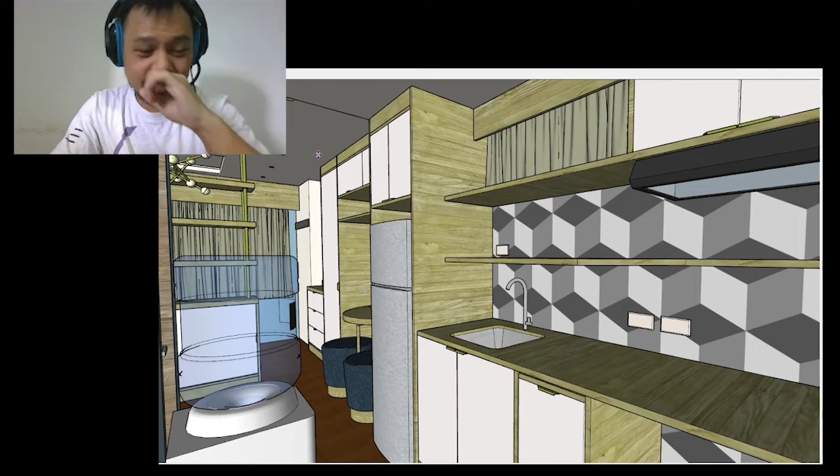Let me give you a little background. Last time I was finalizing everything, but right now it's all pretty much finalized. I submitted a rough figure to a couple of contractors so that they can provide cost estimates and billing estimates. Today I'm just gonna finish everything.

No more chit chat for today. Everything is already pretty much done, so let's get to this.

I'm gonna be using three different softwares today: SketchUp, of course, CAD, and Lumion. There are different kinds of software that can do everything I need all in one, and SketchUp is one of those softwares actually.

But there's just a different level of accuracy with CAD, and Lumion is more user-friendly, so I can get things done faster. I can also make floor plans and do renders here on SketchUp, but I've just been used to doing it that way ever since I can remember.

Just because I do it that way doesn't mean you have to. It all depends on your own personal preference. If you can give out the same level of output or better on a different software, go with it—whatever you feel comfortable with. Of course, if you work for a certain company that only allows certain software, then that's what you have to get used to.

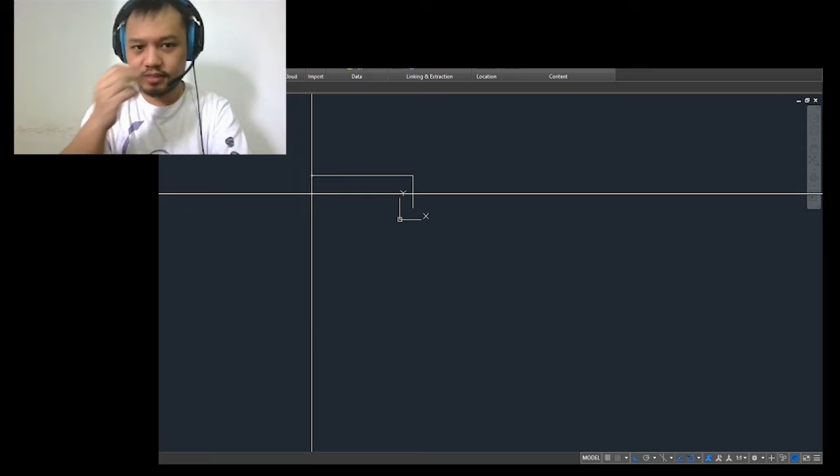You can actually export these kinds of things from SketchUp to CAD, but just for the sake of this, I'm gonna do it all from scratch. Besides, it's not really that hard to do—it's not like it's a super big building, it's just a condo unit, studio unit, for that matter.

Just give me a moment here. Let's see here. All right, so let's do this. Oh shoot. Delete. Okay, next. Okay, and let's go ahead and that and that. Okay. All right, all right, all right.

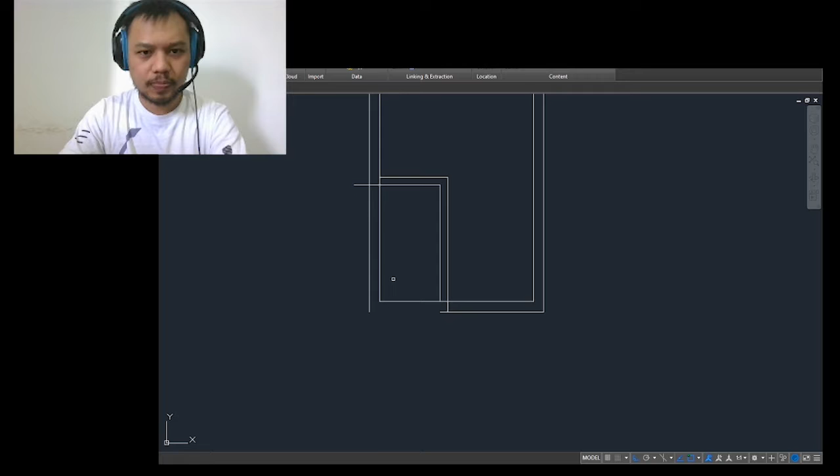I don't quite recall, but I'm pretty sure there's a column over here on this side. But we're kind of gonna disregard the restroom for now.

Okay, now how big is the door? 1030. There we go. And let's make sure that's correct. Let's see, 620, that's good, that's good. Right.

Okay, and then how far is the comfort room door? 1405. Right. Okay, so 1405, go over here. Excuse me, 700. There we go, trim that off. Okay.

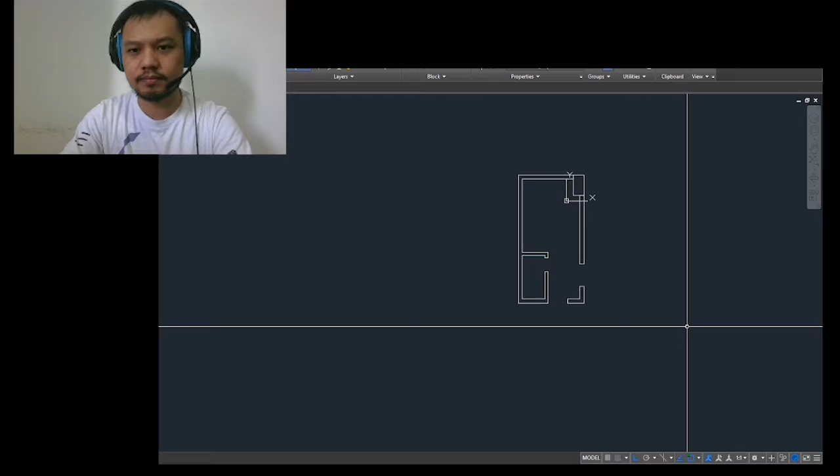Move 640 and then 1150. Right, trim those off. Okay, good, make those joined. Bam, so we get all that.

And then we have the window next to the bed. Where is it? There it is. 730 and 1605. All right, move 730, 1605. Bam, trim that, bam, bam. All right, join those. Bam. Okay.

Next thing we're going to do is make some doors. Let's say 45—oops, 45, 40. These measurements are just based on my knowledge of how they should fit, but you'd still have to actually go to site to know if they're correct.

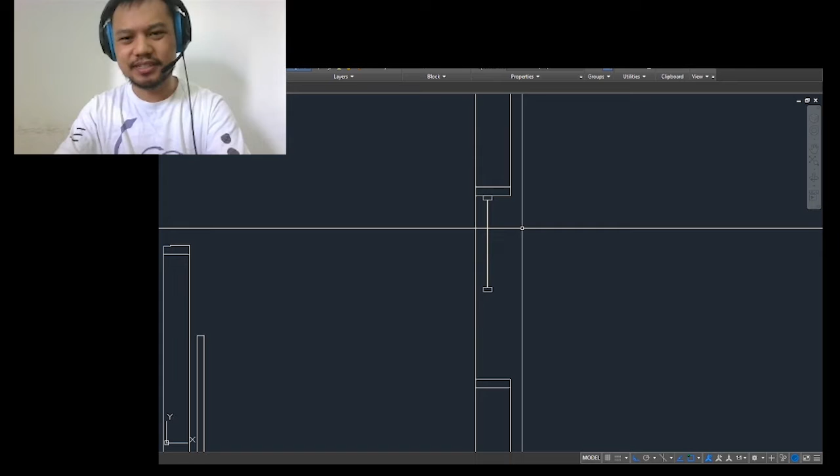And then let's go ahead, bam. This one is right underneath. I'm kind of meticulous with the way I draw, so I'm gonna put this in the back. So this is the sides of the window frame, the window sash, that's what it's called. Window sash. And this is the bottom, the base.

Then we're gonna go ahead and make this into a group first. I'm making them into groups now, but eventually I'm going to have to ungroup them because I'm also going to make them into layers. So let's go ahead and move this here. Bam.

So now we can remove this one, and we're going to make another base for this. Once again, drawing order: center, back. Okay, now I'm gonna go ahead and copy this one here.

Shoot, I don't quite remember what kind of window this is. I have a feeling it was a casement window. Let me just take a moment here to go look back at it. One moment. Images, site visit, October. Man, I've been working on this for a while.

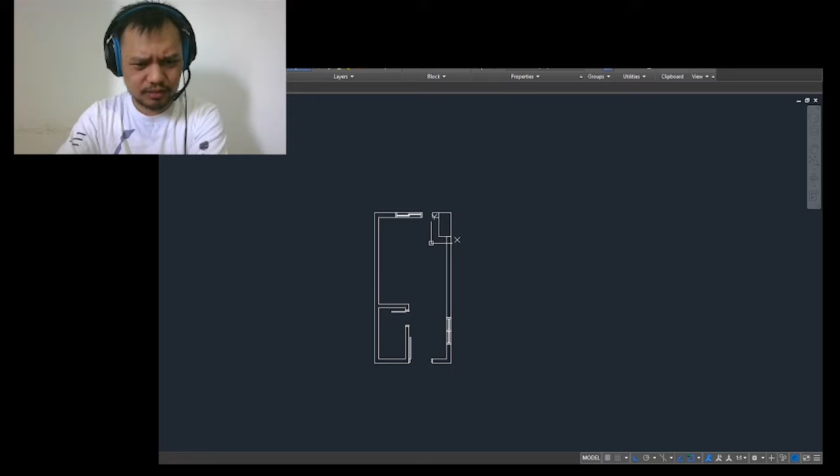Okay, and how does it work for the window over there? Excuse me, I'm so sorry. I just really had a hankering for something sweet earlier, so that's the thing about eating sweet food as you get older, huh? It just gets stuck in your throat.

Okay, I'm gonna have to guess, make a guess on how big this is, but let's go ahead and see what we got. First thing we're gonna do, ungroup this window, we'll just do them separately. Sometimes I forget that SketchUp and CAD have different properties. There we go.

Now, I'm gonna go ahead and take this. You're gonna take one of these, center. I feel like it's right in the middle, so. And we're gonna move this right there. Let's stretch it all the way to the end.

Bam. This one is actually a fixed window, so I'm going to go ahead and take these and take that, and oops, sorry. Let's move this one to the center as well. Okay, and to the end. Bam.

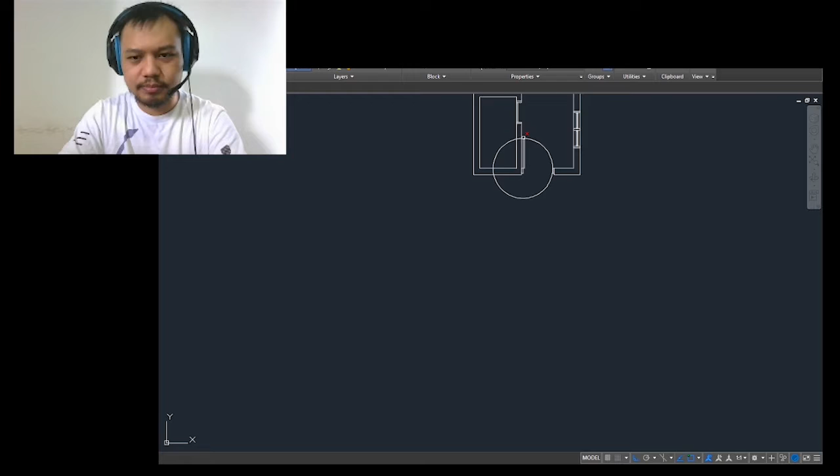So there's many ways to make a door swing. All that really matters is it represents that there's a door swing. So I'm going to go ahead and do it that way though. Group, edit, add. There, so I got that now. All right, so do we have everything correct now?

So I got two awning type windows in the kitchen and one large awning type here in the main area, and a fixed window. Then we got two doors. One of them we're going to close off because we're not going to be dealing with the comfort room at the moment. We're not going to be dealing with the toilet.

All right, and with this one, let's just delete these. And we're going to copy this one.

Now for a reflected ceiling plan, the doors have to be closed. Well, they don't have to be closed, but I advise you to just close them. And since we're also going to be able to see the top of the door, I'm going to add this here for the upper door, the upper part of the door jamb, the header. I'm going to go ahead and send it to back.

Good. We're going to go ahead and copy this. Copy. Oops, grabbed it by the wrong spot. Sorry, got to grab it here.

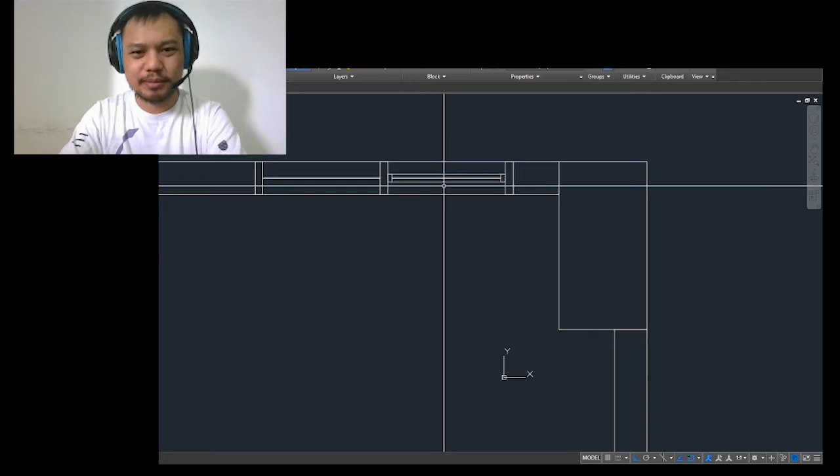Let me go ahead and fix that. Ungroup. Okay, oops, sorry, that's another thing about CAD. In SketchUp, when you grab something, it's all individual, separate, blah blah blah. But when you grab something here in CAD, you have to make sure to ungrab it, because sometimes what happens to me is I grab something way over here and then I'll grab something way over there that I'm going to delete, and then when I delete it, I delete both items. So if you're going to delete something, just delete it separately.

Or make sure to always press escape, because if you always press space, then it's just going to repeat the last command. All right, so now we have that, we have this, we have that. Next, what's next? Next, we're going to do the fit-ins.

So let's go ahead and do that. We're going to use this as our basis: 1790 and 600. Okay, 600, 1790, bam. All right, next, go ahead and close that here.

Got a rectangle. And here for the refrigerator, let's double check the measurements. We have 620 by 620 by 620. Okay, so 620, and then we're gonna make the thickness here. Close, okay, and copy that.

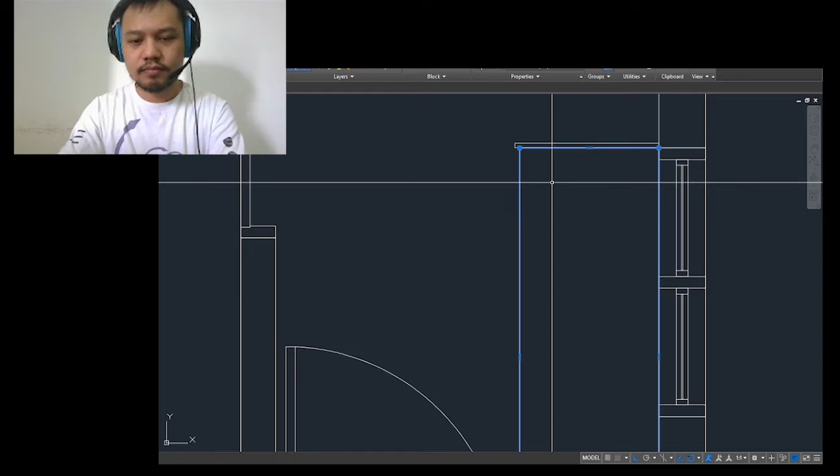Next. One thing that people don't take into consideration when doing these kind of designs is when you do tiling works, the back of this is going to be a bit thicker. So what I'm going to do is move this about 10, both of these about 10. And since we have a bit of space here to spare, I think it'll be fine.

And after that, I'm going to move this one here by 10, and this one by 10. Because the thickness of a tile can range somewhere between 5 millimeters to 8 millimeters, and then you have the thickness of the adhesive. So we're just going to make it safe by saying it's somewhere around 20. Bam.

And to really hammer the point home, I'm going to put a line between that. Bam. And we're going to move this up a bit, let's just say 2 millimeters. There we go. So yeah, it's a big deal because that's a lot of space. I mean, it's as thick as this wood here. So if you can imagine how many times something as small as that can affect what's going on site.

Well, it happens often. Okay, so now we got that. Next thing we have here, let's go ahead and create space here.

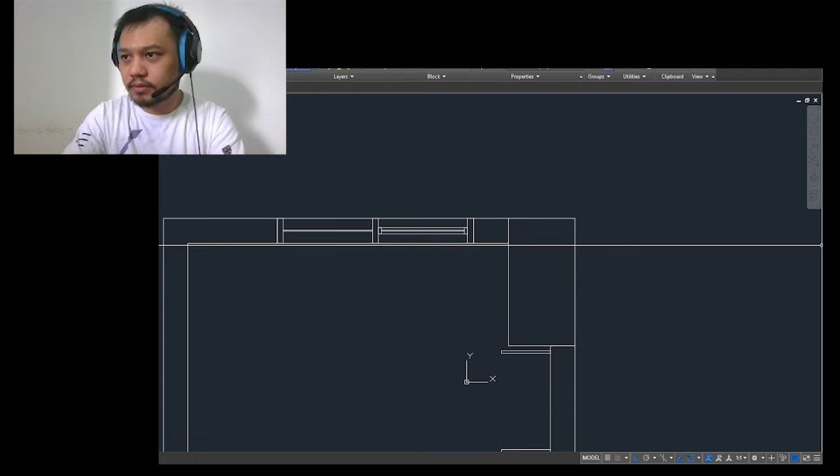So that's not right, something's wrong, because it should have touched this column. So let me check the thickness of it - if it's correct, 835. Measure that. 835, so that's correct. This is 800. And this is 840. So we have a mistake here somewhere.

Let's try working backwards, shall we? Hundred, bam. So as you can see, I like to be as precise as possible. Of course, this will still change once they do their site inspections, their own site inspections.

680. Oh man, something is way off. 420. Man, I have to figure this out. One moment.

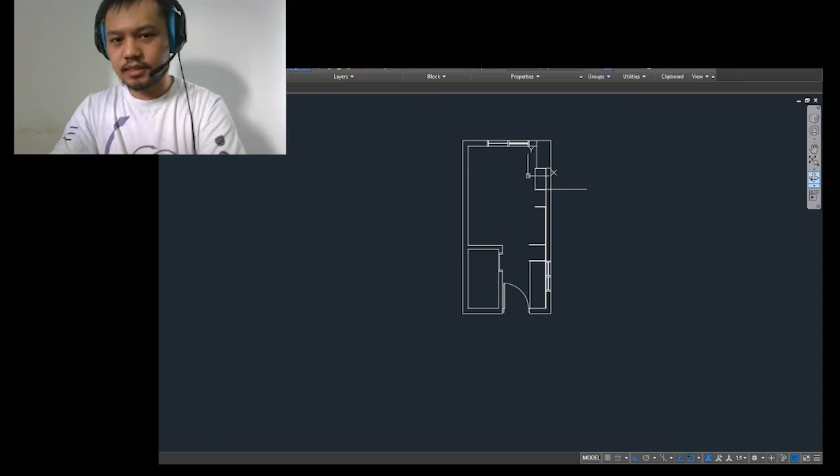3765. Let's see if it's really off by 40. 3765. 2340. 2380. Yep, it's off by 40. Okay, we found the problem. 40. 40. Okay.

Pretty sure that these are correct. So what we're gonna do is grab these, stretch it 40, just like that. Flush. Bam. Okay, let's check that again now.

So we have here - oh shoot, we have here 640, oh sorry, not 640, 1790. All the way here. Okay, 1790, correct. 620. Okay, 620, correct.

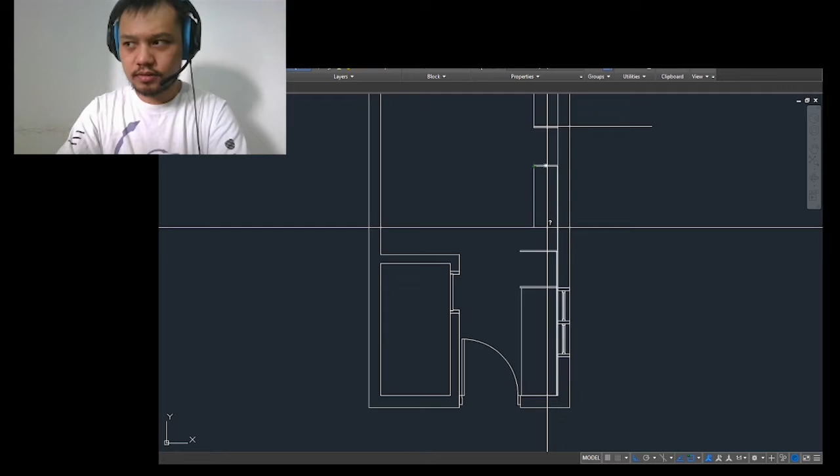1420. Measure. What the hell am I doing? Why is it wrong again? Damn it, I hate this.

1420 from the edge. I just moved it 20. I don't understand, I forgot to move again. 20. Okay, now it should be 1420. Thank you.

Okay, and this should be 640. Gosh. 640, yes okay. And lastly, this should be, how many did I say earlier? 800. 800, okay. From this end to this end. 800. We did it guys. Man, it took forever, I'm sorry.

Okay, next I'm gonna cover this up here, and we're gonna make a face of a drawer. Okay good. And drawer guides are usually 10 millimeters thick, so I'm gonna go ahead and make that 10 here. Bam, and we're just gonna mirror that to the other side. I'm not gonna make the details of the drawer guides themselves, but we are going to complete this whole drawer here.

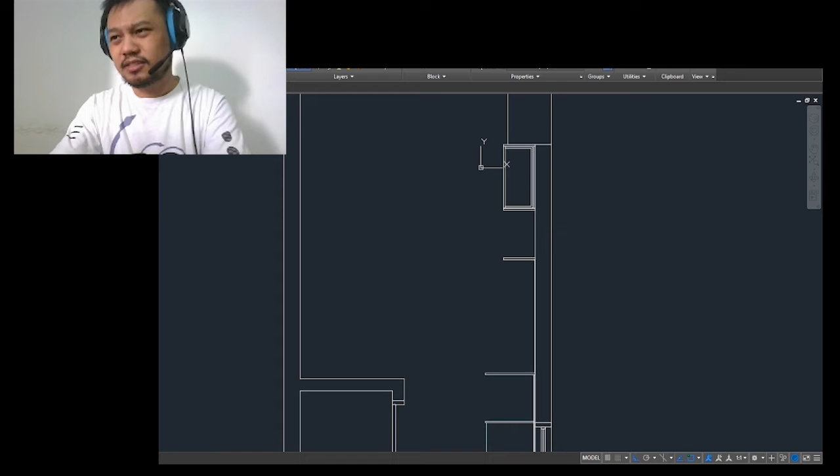The thing about as-built plans, though, is it's still made by humans, so we can't really say that it's going to be perfect, but we can do our best to make it perfect. There'll still be variations - the most you can hope for is a variation of about plus or minus 3 millimeters. Anyway, so this should be 400 right here, right?

400. Yeah, all right, so this one we're gonna kind of do the same thing.

But this isn't a drawer, so this is a bit different. This one is our special made clothes cabinet, closet, something - I don't know what you want to call it. So we're going to go ahead and extend this by about 10.

We don't want it to be flush to the wall like we did here with the cabinet. As much as possible, I don't really want anything flush to the wall, but there are some things we have to compromise when designing.

Now I'm not really sure how the contractor plans to make this cabinet. On my end, I provided the idea of having caster wheels below, and then above there should be drawer guides. That's my idea. But anyway, so this thing has no sidings, right? So bam.

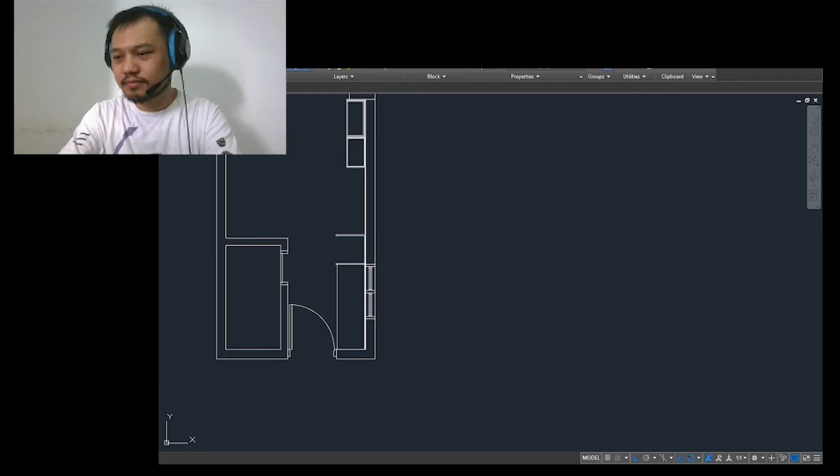So in this instance, I do have these two windows shown in the floor plan, and it's one of those things I really hated when I was studying architecture, because I don't show windows above that height since you wouldn't see them on the cut of where the floor plan is. So it's kind of interesting that these particular windows are at 1.7, so we can say that the cut is somewhere at 1.8.

And if that's the case, then obviously everything I did right here is incorrect, because this height right here is at 0.7, I believe - I don't remember my own drawing. Or 0.9 actually. So I made it counter height because it's not a desk, of course. So that's why it would be 0.9. I'm just realizing that now.

That's my own fault. What we're gonna do is go ahead and delete these, and we're just gonna make a rectangle here. Rectangle.

Bam. So the reason we cut it that high is because the average counter height is somewhere between 0.85 to 0.95 meters. I would advise making it 0.95, because the lower a countertop is - since a countertop is kind of a workspace - the more you have to bend your back, and the more you have to bend your back, the more back problems you're going to have, especially if you enjoy cooking.

So here, this is correct. Let's see here, next thing I'm gonna do is 195, 400. So here, 195, bam, and 400, bam. So this is actually a very small kitchen sink.

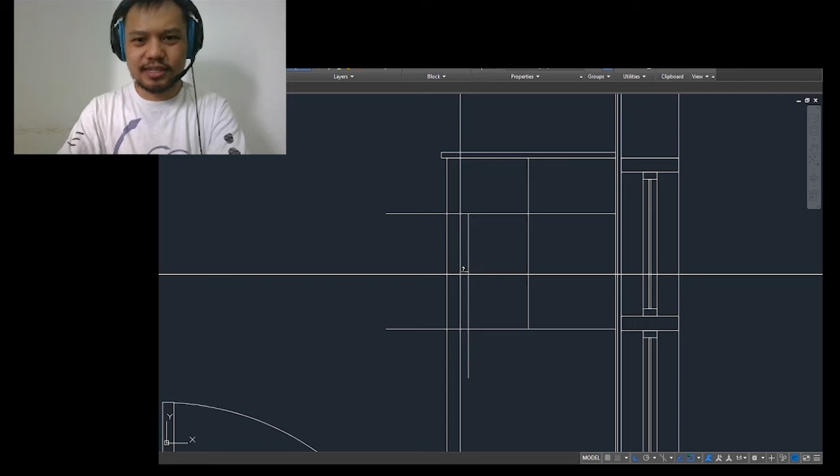This is another thing that gets confusing every now and then. It usually depends on the kind of sink you're going to install, but I would have the sink from the nose of the counter at least 2 to 3 inches away. So in this case, I made it 3 inches, and that's a pretty safe distance.

And this particular sink is just kind of a perfect square. So 400, bam. Okay.

The contractor is going to be the one providing details on where they're going to get that kind of sink. They can either fabricate it themselves, or they can go to department stores and try to look for one that will fit this criteria. Either way, all they have to do is make sure that I approve of the particular design.

So here, let's go ahead and make a radius of, I don't know, 100. Okay, get this here, bam, bam.

Okay, I think this is wrong, let me do that one more time. Let's try fillet, and we'll get a radius of 50 instead - 100 is a bit strong. Yeah, that's better.

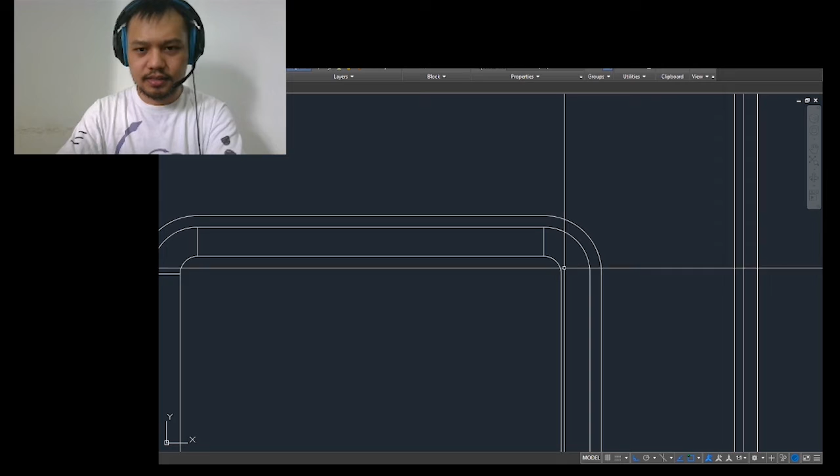Okay, so we can go ahead and take these, and the easier way to do it is just mirror them. Next thing I'm gonna do is put a drain here, right in the center. I'll just make it 2 inches.

And finally, here we're gonna make it 1 inch, a 1-incher. So 12.5. Move it back 50. Okay, that seems a bit far, let's make it, I don't know, 30. Yeah, that seems better. Copy that - oh shoot, copy, I always get circled when I try to make a copy.

100, that's fine. Polyline, bam, another polyline, bam, and we got our pipe. Let's go ahead and do this here. We'll make it 3 inches out. And this one, move that. Let's say 25. Let's copy again, make another 25. I think this is too far, let's go ahead and pull it back. Yeah, that's better.

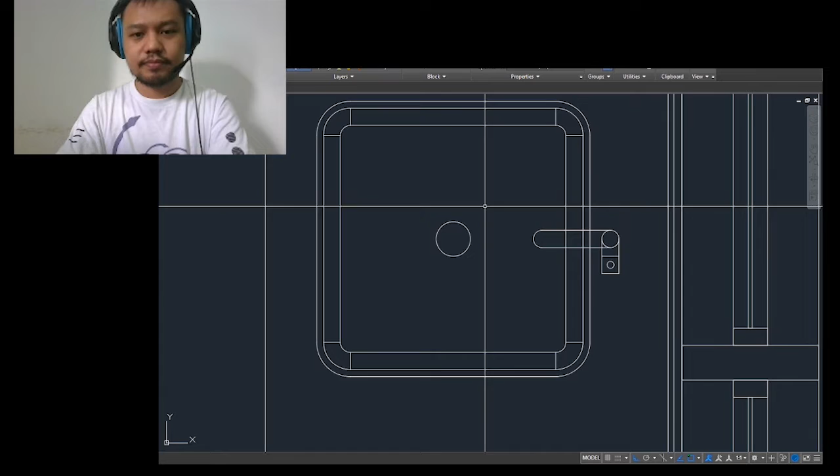Next thing we have here is the refrigerator, 600... is that right? Oh, they have a smaller ref actually, let me just double check that. 540 by 610. So 540, 610.

540, close. You can actually use the rectangle command - I'm so used to using the polyline command that I find it easier, because with the rectangle command I always get the wrong rotation and end up rotating it at the end. So I just stick with the polyline rule, it's easier for me.

All right, and then we'll extrude it a bit, about 25, 1 inch. PL, right, let's move this. Let's say 10, and let's get another one - 25, or sorry, not 25, 2 inches should be fine.

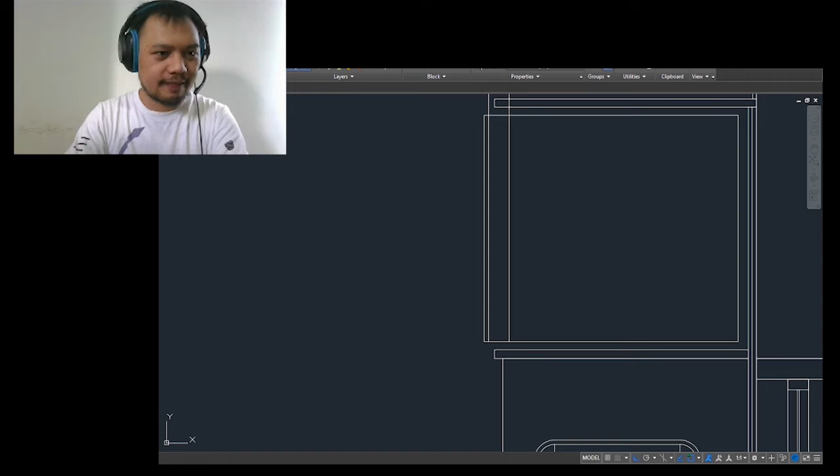Then let's make an arc here. Start and radius. Start and - oh shoot, no no no, what's a better... start and angle? Man, I always get this mixed up. Let's go with regular arc then - start, center, end, there we go.

Delete that. Trim these, bam bam bam, thank you ma'am, all right all right all right. Trim this, get rid of that. Copy this again for another, I don't know, 10. Yeah, that's our refrigerator.

And next we have, of course, our single burner induction cooker. I'm just gonna go very simple, 300 by 400. 300, close. Okay, go ahead and move this to 200, that's fine I suppose. And let's say 50.

And then this one, move that 50, I suppose. And then another 50. Trim these. Polyline. Circle, let's say 125 - oh shoot, circle again, one more time. 125, perfect. So this is our induction cooker.

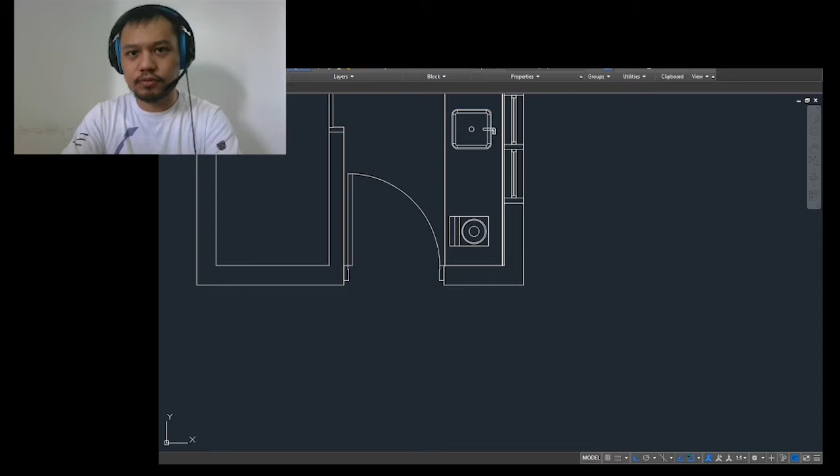So we have overhead cabinets here, so the depth is 400 by 640. All right, 400 by 640. Okay, close that. Next.

So we can actually center this, can't we? Let's make this into a group. Eventually, down the line, I'm going to start making layers, but for now I'm just getting the whole thing ready. And here on this end, we have shelves, which are just right there.

And over here, we have more overhead cabinets, so 400 - or let's just make a rectangle, simplify things, all right. Okay, good, nice nice nice.

Let's go ahead and start working on the other side. Gosh.

I know it's stressful, but this is a part of architecture, so if you want to be an architect, you gotta do it. And if you want to hire an architect, please, please, please respect what we do, especially if they put as much effort as you see me putting here.

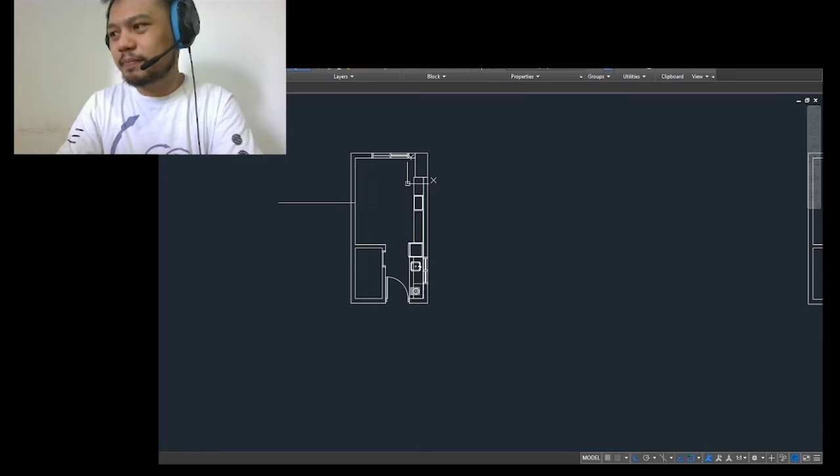Man, so I mentioned before, this I'm doing on the side, and I also have my main job. And as long as there's no conflict of interest, there's nothing to be concerned about - nothing for me, nothing for my job, no problem. So I do these things on the side. A lot of times people just don't understand or have the ability to appreciate those things, so I kind of just have to make the best of it.

Let's see here, rectangle, delete that. Okay. Then let's measure this distance here - 700, perfect. So it looks kind of small, but it's actually as big as this door right here. Crazy, right?

Next thing, just gonna put these 1-inch pipes. 150, 50. 150 and 50.

50 and 150. We're going to mirror that. And we're going to mirror those. And we're going to get the center of this here. Right there. Okay, and those are going to support the shelves. So as you can see, this floor plan is coming along nicely.

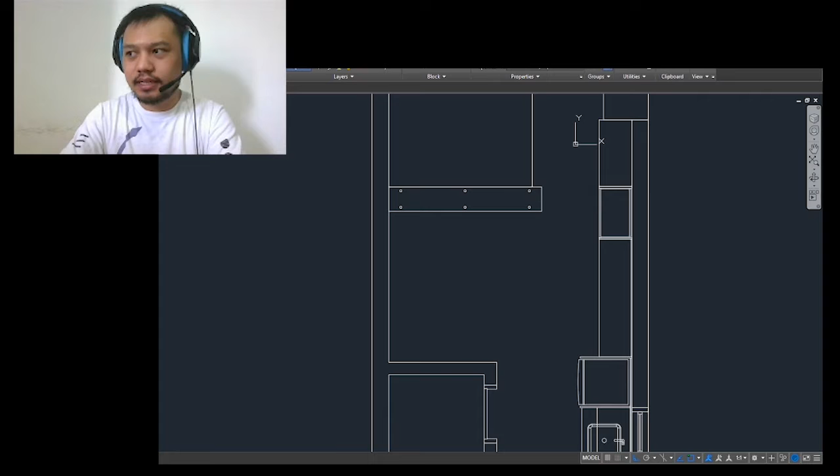Next, we got the sofa bed. Oh, here, by the way, we have a baseboard.

Let's start here. Move that by 10. Then stretch this edge. 10, bam. Okay. Close. Oops, that's not what I wanted. Where'd it go? Damn it. Shoot here. Okay, there we go. Get that one and get that one. Join. Okay, we got the baseboard and we have a baseboard on this end as well. 10. Bam. Close. All right, we got the baseboard.

Next, we're gonna add the sofa bed. This is, come on, 975 by 1624. 975, 1624. PL, 1624 and 975. Bam, sofa bed. All right.

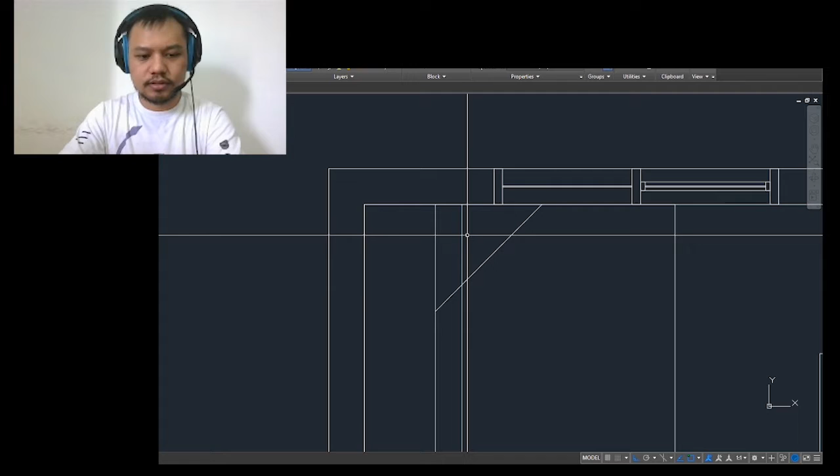So we're just gonna use basic drawing tools here, or drawing techniques. Let's see here. Go ahead and make this 300, or you know what, 400. Okay, copy that, 150, nice. PL, let's go here and say 600, 600, 600. Okay, get a line here, bam, delete that, trim this line, trim this line, okay, thank you. Then we're gonna make a line here, indicating pillows, bam, there's our bed. Here on this end, gonna make a line here, we're gonna move that 150, bam. Let's make it 75. Bam, bam, bam. So that's our sofa bed.

Okay, and that's the floor plan. Not bad, not bad. So what's the next part of this? Next part is the elevation.

Okay, let's start here. So as you can see, I moved that pretty far away. We're gonna make some lines here. CO. Bam. Oops, start here, sorry. So I didn't really put much detail into the bed and the sofa bed because they're not fixed items. So anything that's going to be fixed is what we're going to pay more attention to. I know that seems a bit unfair to the things that aren't fixed, but what can you do? Anyway.

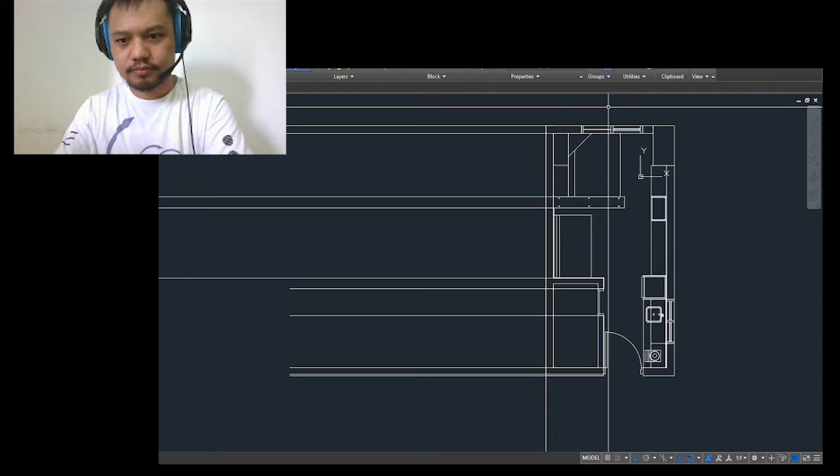Bam, bam, bam. Okay, next thing, gonna go ahead and do this. Oops. Let's go ahead and get this as well. And we kind of want to capture the window here. So we'll get that in a moment. Anyway, let's move this here. 500, nice. Gonna pull those out, and we're gonna extend them all the way there, okay?

Now let's get the ceiling heights. Okay, ceiling height number 1. Since we have several ceiling heights, we're gonna have to get them all. We have 2290, 240, 2290, 2400, 2500, and 2180. All right, I already forgot most of them. 2290, 2400, 2500, and 2180. Bam. Okay.

So the first one is right here. Bam. Okay, so we can delete these. The next one is right here somewhere. Okay, so anyway, that's pretty much it. The lowest part here is in the kitchen, so that's what's important.

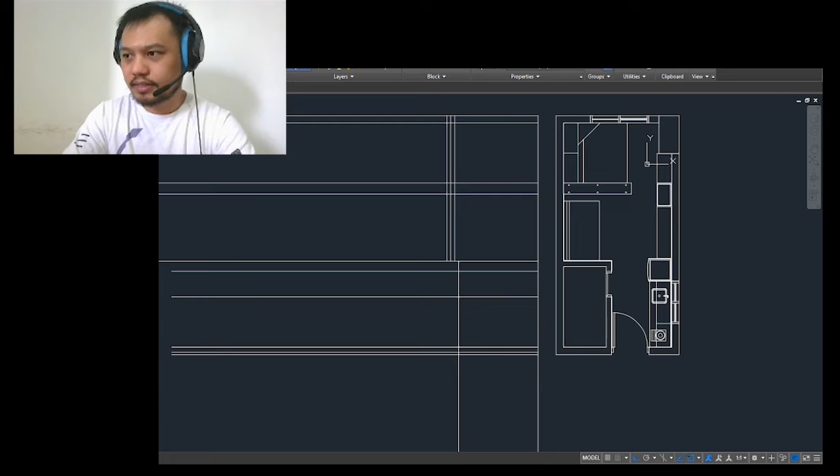There's a beam. All right, let me see here. Line, 235. Okay, 235. Let's go here. 235, and oh wait, that's wrong also. Should be from here. 235. There we go. Now we got it right. Right there.

Okay, then we have 200. CO 200. And then from there we have - I already forgot. All right, come on, where is it? 980. Okay, 980. Bam, perfect. Let's go ahead and trim this, trim that, remove this. Okay, trim this part. Nice.

Here, let's go ahead and put it as 50. No, that's too high. 40. Yeah, 40 is fine. 40, and then 12.5, and then here we'll have it at 20. 20? No, I think it's more like 15. Oh, sorry. 15. Bam. And we'll have this at 80. Yeah, just like that.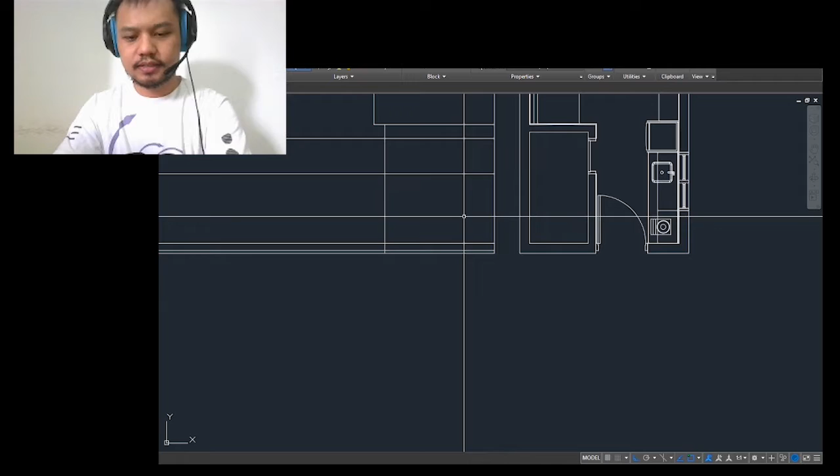Next, we have the height of the door. The height of the door is 2,200. Let's go ahead and make a line here, move that 2,200. Bam. Okay, I made a mistake. That can't be right. Oh, it is right though.

2,200. So how high is the ceiling here? Come on now, 2,290. How high did I make it here? 2180. This is the wrong one. Shoot. 2290. 2180, 2290. So this should be plus what? Oh, sorry, what was it again? 2180 plus 110. Gotcha, 110. Bam. Okay, perfect, now it's correct.

Okay, extend this up. What is the height of the comfort room door? We just have to add 140, or here, PL. Move this 140. Bam. Comfort room. Okay, we can join all of those. Bam. And here we have what?

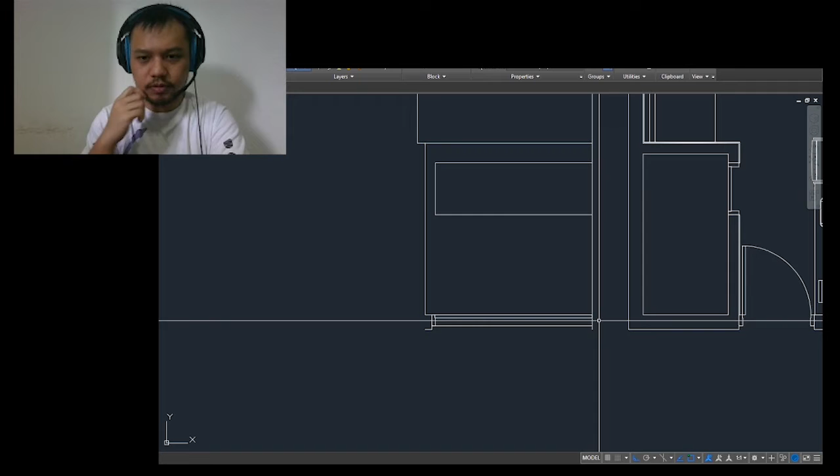So we got one jamb. Okay, and I'm gonna go ahead and make this 45, 45. Close this out over here. Bam. And a rectangle for the actual door. Bam. Perfect. Then let's go ahead and add a line just for safe measure right there. Bam.

With that said, I made a mistake over here, didn't I? It should be 2180. Yeah, this one is supposed to be down 110. Okay, perfect.

Next, let's go ahead and put one here. Let's make it 10. So this is actually way too thick. Let's try that again. I feel like it should just be 7.5. And then we'll move that 25. Then we'll move you 7.5. Okay, let's measure this. Measure this. 14. That's not right. Yeah, whatever.

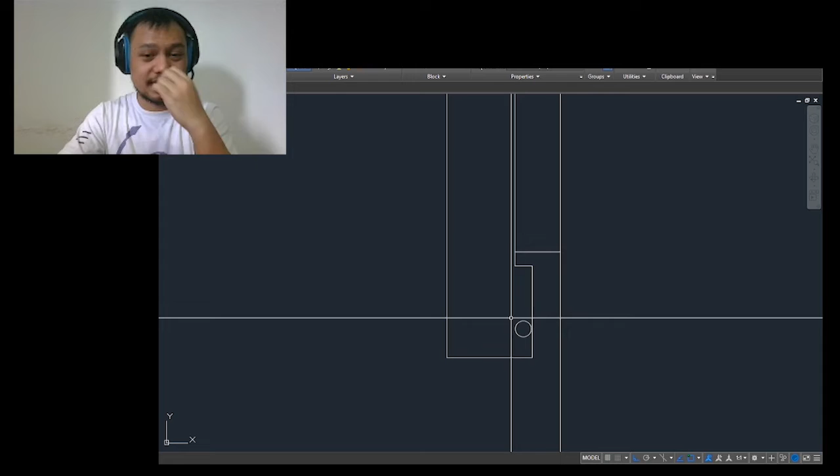Anyway, it's up to your personal preference. You can do it whichever way you feel looks best. But that's kind of how they taught it, because the whole idea of it is indirect lighting. And the reason we want indirect lighting over the bed is that way when you're trying to sleep, you don't have flashes of nightmares in your face. So you don't have the brightness keeping you awake. So even if it's on, you'd still be able to fall asleep pretty peacefully.

Okay, let's go ahead and make the window now. So the height of the window is at 905, and the total height is 1245. 905 and 1245. 905, 1245. Okay. 905. Oh my gosh, why am I always... 905, then 1245. Okay, so it's almost at the top.

Okay, get rid of those, get rid of that. I'm gonna go ahead and just make this a rectangle. Okay, get rid of that, get rid of that, get rid of that, bam. This one, go ahead and join these. So the reason I didn't make this part of that rectangle is because this is going to be a beam, which I should probably do now.

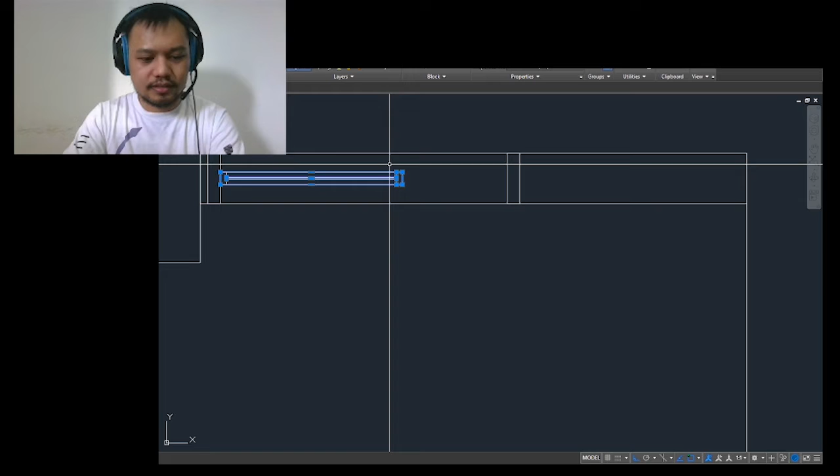Stretch. All right. Bam. Okay, so we have one. Now, the height of this one, nine hundred. 900, and then this is 50.

385, let's say. 385. Array. And we're going to make this into 3. And then we're going to make the height 385. Is that right?

Oh, that's because I didn't take into consideration the base. 385. There we go. That doesn't seem right.

900. Oh, that's right, the thickness of the shelf. Oh my gosh, copy. I always get circle, but I always press the O. Bam. Thickness of the shelf has been considered. Delete those.

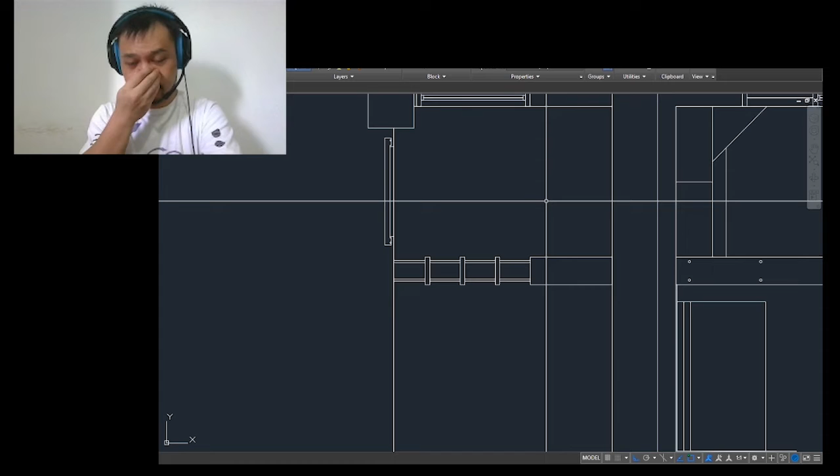And mirror. Bam. All right. There we go. So that's all of that. And then,

So on the elevation, what we're going to include is the outlets and the switches. Typical dimensions of an outlet and a switch. One moment. Let me finish this after all. I forgot.

Bam, bam, bam. Okay. Get that, get this, get that. Join those. Then this right here. Bam, trim. Bam, bam. Join those. All right, get these, get that, join.

Nice, nice, nice. Oh, I forgot about the door. Offset by 50. Bam. The door, we're not really going to put details on that. We're just going to put the opening. Bam and bam. Nice. Okay.

Next thing we're going to do is the outlets and the switches. So the typical plate for that is, let's make this 90. Ah, wrong way. Let's make this negative 90, sorry. Rotate negative 90.

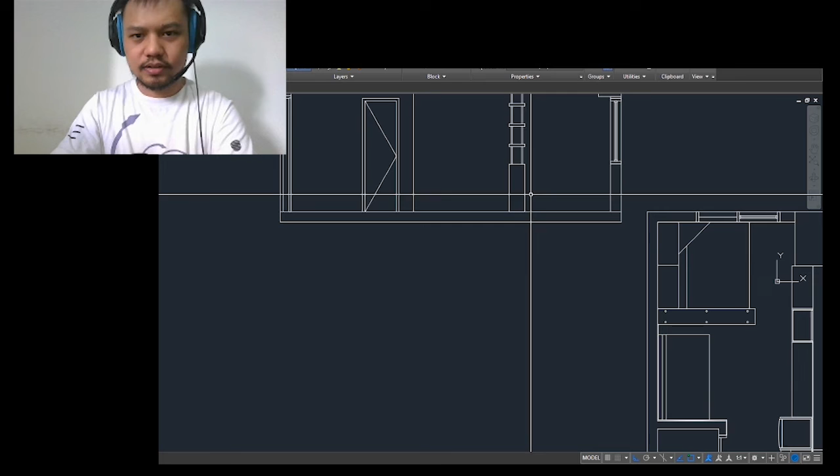Okay, everything is complete. Outlet, once again, the typical face dimensions are 70 millimeters by 120 millimeters. And they are from center, usually 300 millimeters off the ground.

Now here, we also have the baseboard, let's not forget, which we've made as 100. Okay. And then we're going to go ahead and make, and they're 1 centimeter thick. Bam. All right, perfect.

And where is this located in relation to the wall? We're going to go here, 1710. Okay, we're going to move that to 1710. Bam. So there it is. Very almost complete.

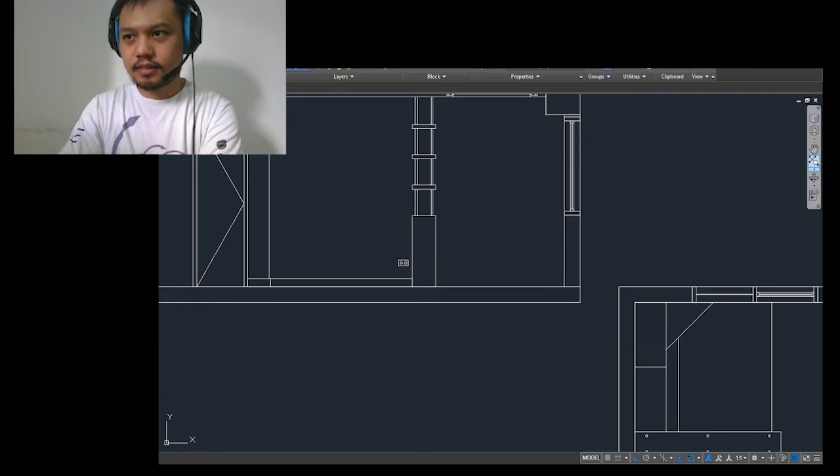And we have another one here near the bed. So let's see here. It's 685 off the ground and 140 to the wall. 685 and 140. So move that 685 and then move it 140. Why is it higher than the standard? Because the bed is here.

So remember, even though we do have standard heights and standard depths and standard specifications, we still have to customize it based on the need of the project. So as long as you can always justify it properly, then there's no problem. But if you just do it for the sake of it, then you might have a problem. All right.

Okay, let's go ahead and copy this one and put it here. Stretch out here, bam. And then here on this side, we also have the panel board. So let's go ahead and figure out where it is. How big is it, first of all?

250 by 395. So let's start there. 250, 395. Nice. Okay. Start here.

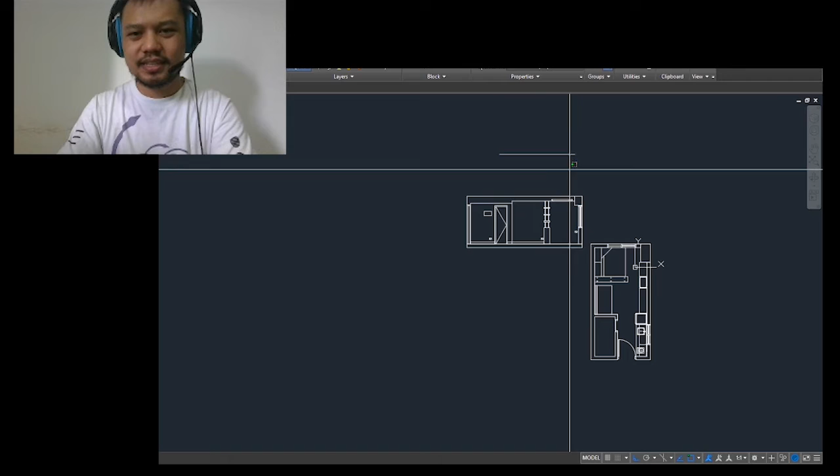Let's put the chandelier here. Oh, you know what, let's not. It's too much work, actually. It's not really necessary. What's necessary is we have all of these major things in sight. So save.

Next thing we're going to do is we're going to work on the other side. So for this case, let's see here. Let me go ahead and just double check something first. Oh no, it doesn't hit what I want it to hit. It doesn't hit the cove. So in this particular instance, this right here is not being hit. So I'm going to have to make it invisible. But how do you make it invisible?

That's a good question, let me show you guys. First things first. So anything that we can't see in the drawing or in this particular cut, because what the section is, when we take that same building and we cut it vertically at a certain point. But we also have to make sure that where we cut it is in the same area as where we'll show what everything is.

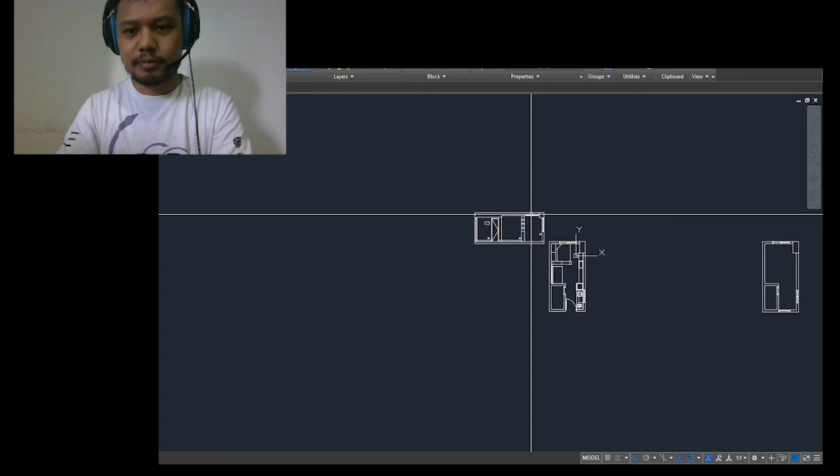So in this particular case, the area that I've cut it is right around here, right around this area. And the cove is in this area somewhere, it ends somewhere around here. So you wouldn't be able to see the cove from this cut. And the reason you can tell it's in this area is because it goes through both the door and the window.

Also, if I were to move it here, you would go through this cabinet shelf thingy, which I kind of don't want to go through that hassle of doing. So yeah, it's best to have it somewhere in this area. Like I said, the job is really hard, so it doesn't really impress - the average person won't be impressed if we do a section somewhere difficult, to be honest. Even when I was studying architecture, my professors wouldn't be impressed by that kind of stuff. So you might as well just do it in a safe spot that you can see everything and it's proper.

But in this kind of case, what we can do is just make it into a hidden line, so that way at least we know where it is. So we're going to go ahead and grip that, and I'll deal with it later when I start making layers.

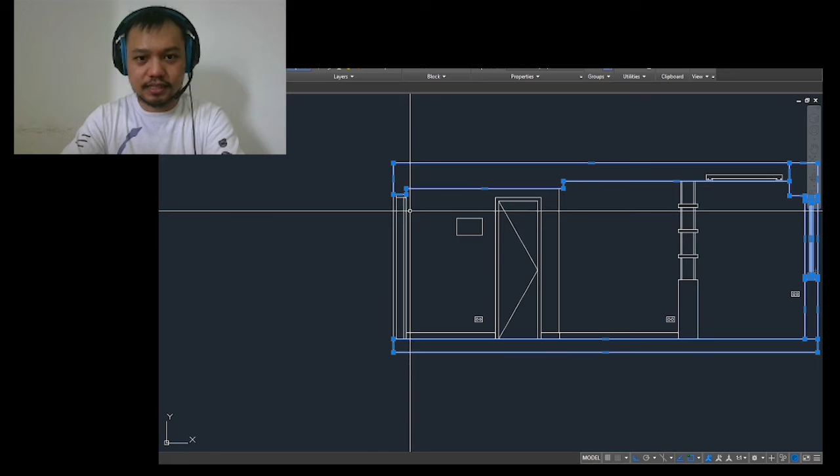We're going to mirror it. I don't know where the center is, so whatever, we'll just mirror it there. Whoops, ah darn it, made a mistake. Yes, I accidentally pressed cancel. Right there, okay.

And we're going to rotate it. Rotate it, why is it not? Why do I always get rotate? I think my O is broken. Then just align it there.

Yeah, perfect. So in this instance, we're actually going to take into consideration the cabinets, because these cabinets are fixed - the cabinets and the shelves.

Oh man, so many things to draw. Okay, and then here, let's go ahead and make this, move it up 900. Right, perfect.

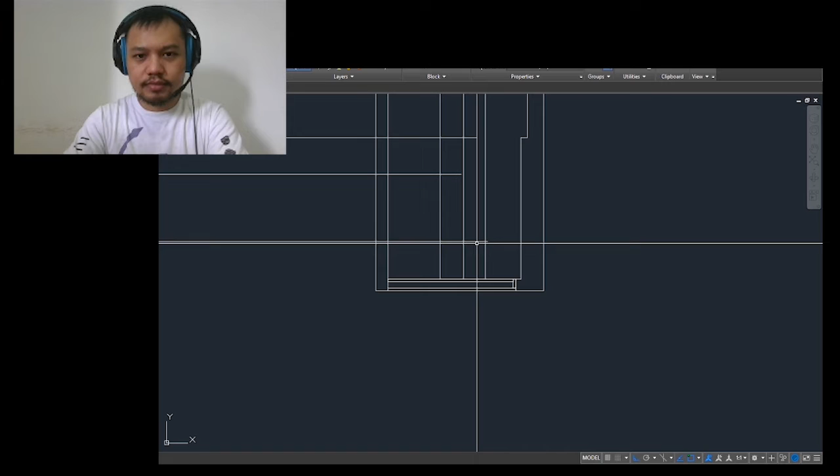Then we're going to go ahead and move this up. Okay. Shelf 1 and shelf 2. Right.

Okay, we're going to trim it right here, okay, so we can get rid of that. And for this one, we can copy these. Oh shoot, circle, copy these. Oh sorry, copy these, damn it. There, so we have a thickness there. And we'll copy this one as well. Bam, perfect.

Oh no, no no no no no. Let's see, and this one, 650.

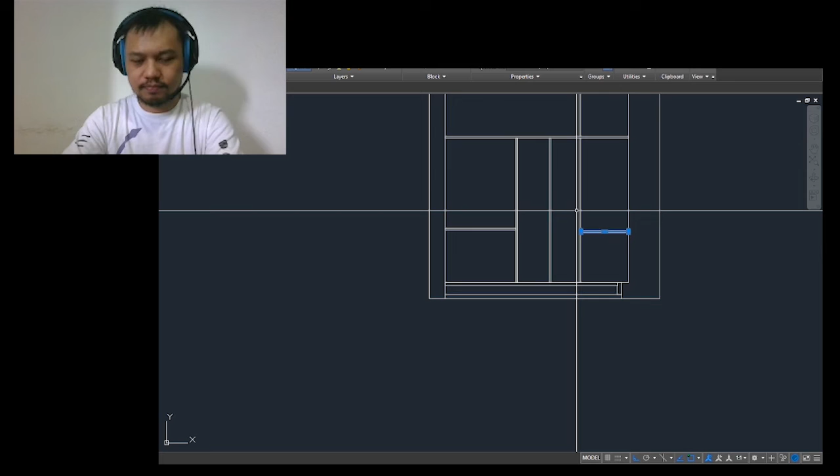Excuse me. Got that one. Gonna make a rectangle here. Perfect. Move that 120. Mirror. Bam. Perfect. Then copy this one.

Okay, cabinet 1. Here, gonna go ahead and move it up here. 20. Then move that 100. Rectangle. Bam.

Perfect. Okay, polyline, represent how it opens. Close. Another one over here. Close. All right, and here we have a fascia board, 200 millimeters in depth. 200. Perfect.

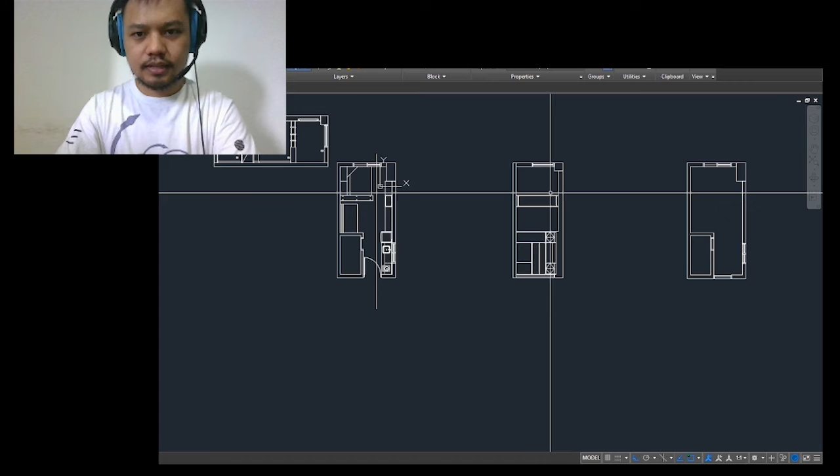And the next thing we're going to do, so there's a beam here. So we're going to go ahead and take this here. Bam. All right, and here, beam. Okay, delete that. Perfect.

And we have more overhead cabinets on the other end. So let's go ahead and check our SketchUp file, which you guys can't see. I'm sorry.

And this one, 1720. PL, move 1720. Another PL. Oh no, that doesn't seem right. You know what, let me try that again.

Bam. Move 1720. Bam. Okay, copy that. 20. Oh no, sorry, let's just make a new line. Bam, bam, close. All right, and is that right?

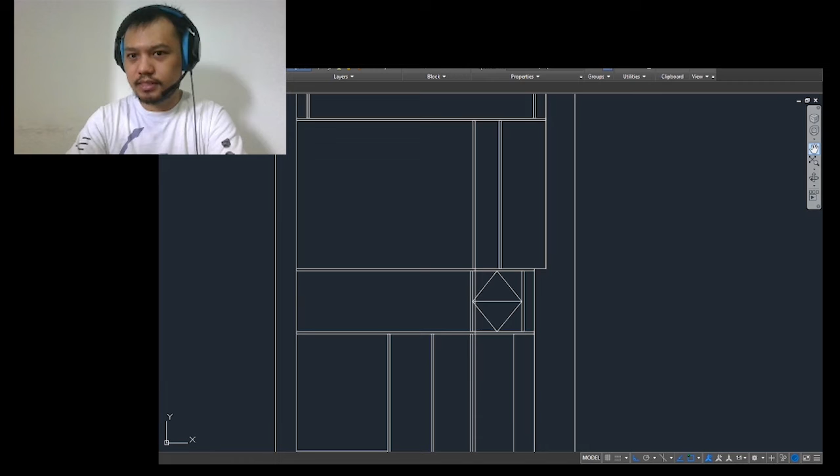Well, it's the correct distance, so we're going to go ahead and stick with that. The next distance we have to work with is this one. Oops, shoot. Which is 250. CO 250. Bam. Right? Please tell me it's right. Yeah, 250. And then over here it is what? 250. Correct. Okay, okay, okay.

Good, good, good. Copy it one more time. Bring it up here. Move this 100. Bam, we're good. Next, rectangle. Rectangle command.

One there, one more on the other side. Good. Then we're going to show the opening. Bam. Mirror that. Bam. Okay, good job everybody.

Oh, we still have this over here, sorry. Back to the kitchen. Let's see here. Kitchen, kitchen, kitchen.

Okay, this is 330. So we're going to move this 330. Bam. And the width of this should be what? 310. Let's double check. 310. That's correct, that's correct. Good job, good job.

And then here, close that. Move this up by 100. And then we're going to make some rectangles again. Bam. Mirror that. Good.

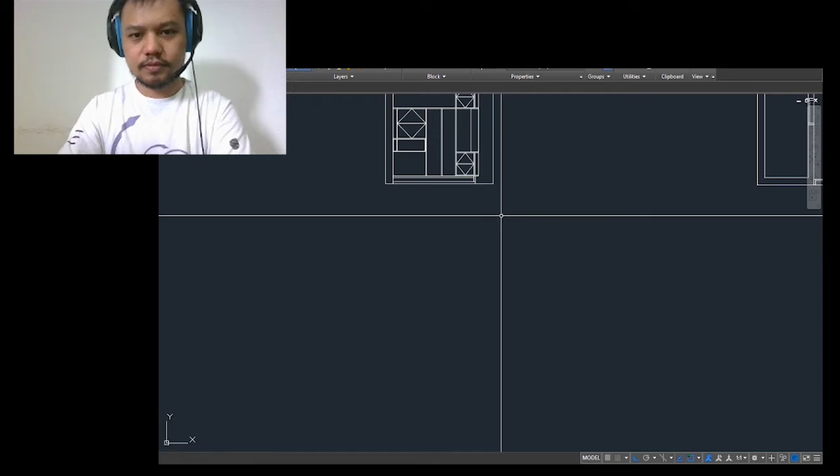Wow, okay. So the way that's going to work is it's just a mirror. We're looking at this side on this end, and we're looking at this side on this side. Next thing, let's see here.

We're going to put the outlets and the air conditioner, of course. 1750. Let's put this first. So this is our clothes hanger.

100 by 800 by 100, close. Okay, move that, 50. Okay, move that again by 20. Perfect.

Next, the air conditioner is way over here. So we have, so this is actually going to depend on the end user. 640, 16.5, or 6.5, 16.5, 640. 640, okay.

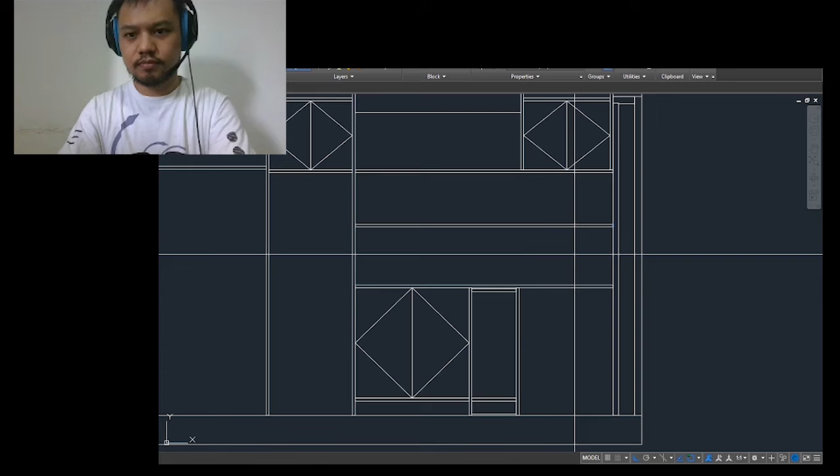Okay, save. And then we have the range hood. Let's go with 75. Join that, that's the range hood.

Curtains go here. Okay, so let's get this and copy it.

So some of these are already existing. 605, 150. Oh my gosh, what the hell? 605, 150. Perfect. And then we have here 135.

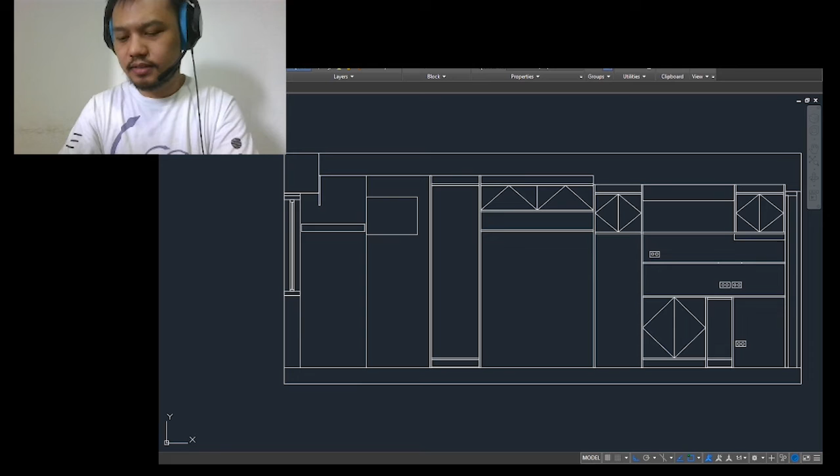1170, 1170, and 900. All right, so let's get one here. CO. Move 1170. Bam. And oops.

Gonna move that 900. So this depends also on the bracket for the TV. We're gonna go ahead and let the contractor handle that. And then we're gonna have one more up here.

Move 100. Then we're gonna have another data line. So for the data line, let's go ahead and fix that up. Let's go ahead and make a rectangle here, 15, 15, close, move, bam. There it is, cable line.

Oh, that's why I put two here. One of them is not an outlet, I think it's for data cable as well. Just copy this one, I don't know what I'm doing.

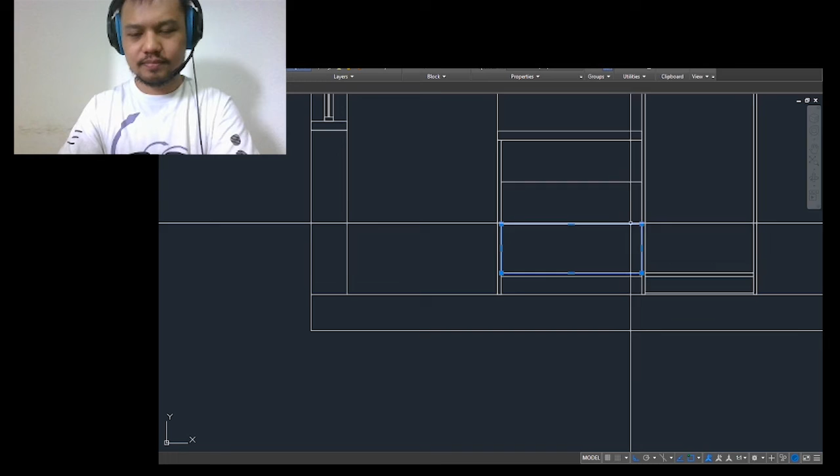But I really wanted them to be equal in height. So let me measure this. 730. Interesting. 730 divided by 3. 230, 233, 243. No wonder it was 245.

Okay, let's try that again then. Let's get rid of this one. Let's try to make it as equal as possible, and still be kind of, you know, not so weird looking. Okay, measure that. 250. So this one is 250 and these are 240.

Alrighty, and then we have more outlets. Let's see, I have 2 of them here. Just aligned here. How far away is it? 340. CO.

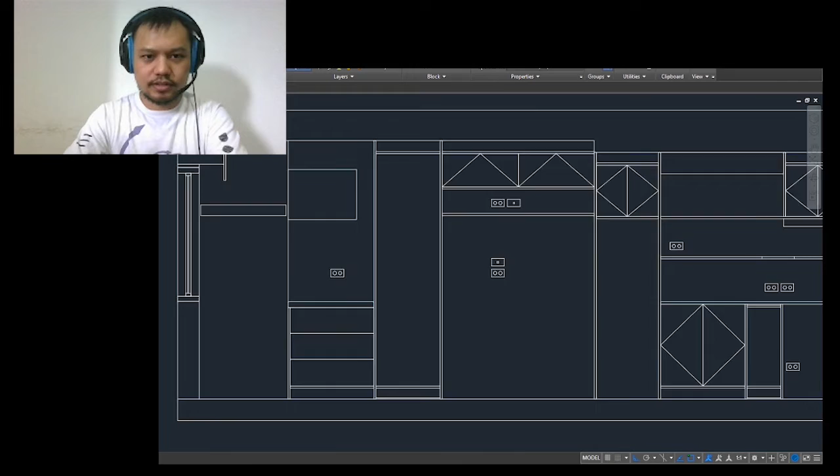Move 340. So this particular outlet is a bit special. Let's copy it first. Ungroup. Okay, this particular outlet is special because it's for the air conditioner, so it's just a single guy.

Come on, where is it? There you are. Group. Okay, and how far away are you from the AC? To 125. 125. Perfect. As for the other one, 70.

Okay, there it is, there it is. Perfect. We got all the outlets and everything, blah blah blah blah. Next is the sides.

Oh man, this is taking a while, isn't it? We're going 2 hours into this, guys. Let's see how we're gonna do this.

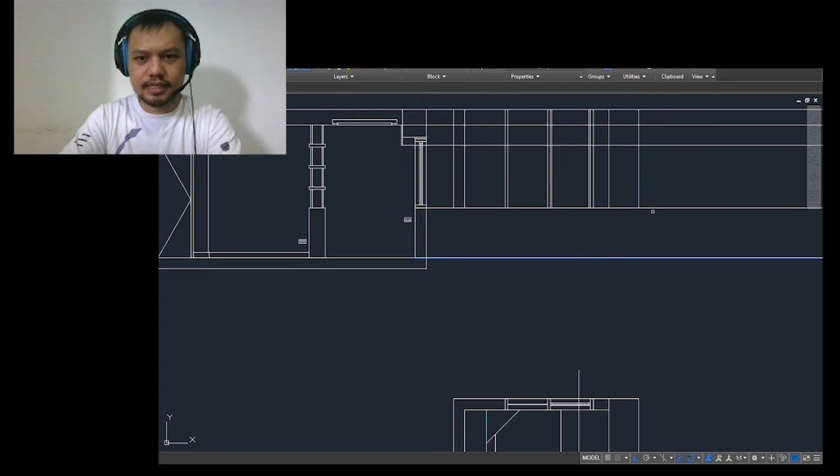Okay, good. Let's go ahead and trim these. So we can get rid of these. And let's just go ahead and extend these.

So we got the beam and we got the wall. Let's go ahead and take that, copy it into there. So that's the wall. We can go ahead and trim all these in here because it's only the wall. And then we can trim these as well.

And then we have the fascia board, which is this whole thing. Am I right? So we can get rid of those. And we can go ahead and get rid of these here by doing this. Delete, and nothing else, right? Good. Now that just leaves the window.

Let's go ahead and start by making a giant rectangle. Then we're going to offset that by 50. And then we're going to get these lines right here. And what about these here? This one, join. This one, join. All right, now we can get rid of these.

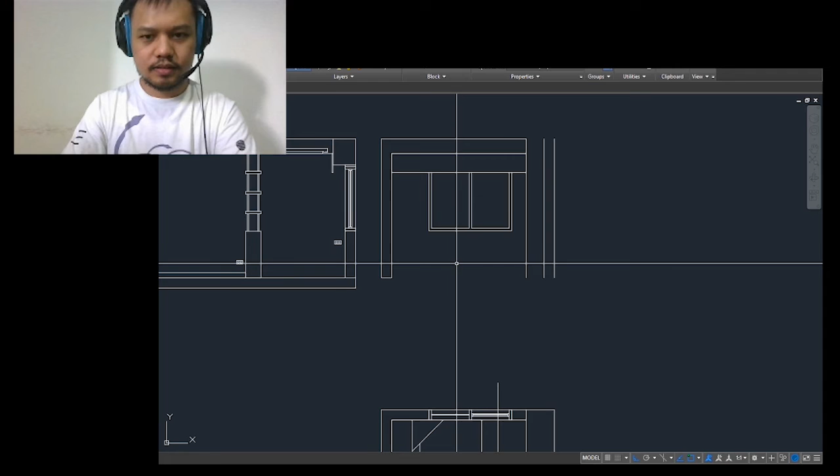Okay, let's go ahead and make a rectangle here. This right here is gonna stretch all the way over here. Perfect. Get that. Okay, perfect. And this one here, just like that. Get that. Move this here. Move that there. Get this. Okay, that. Join. All right, enclosed. Perfect.

And then what's next? We're gonna see this here. Okay. All right. Get that, get that. Good, good, good, good, good. And this. Okay. This one, 50. I believe it's 50.

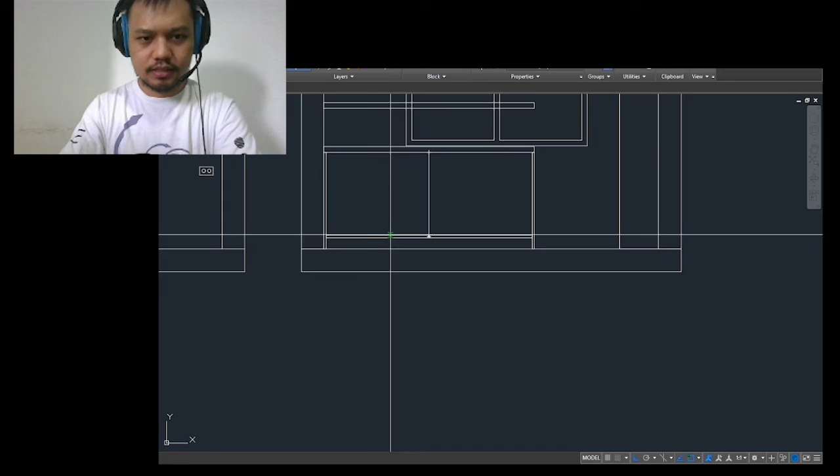And let's go ahead and make these. Oh wait, yeah, that's right. We're going to extend this by 25. And good. Now I'm going to have to trim this part. Trim, trim, trim. Trim, and trim. Perfect.

Okay, got this now. And copy that. 1, 2, and 3. Good job. Now we got this one. Oh shucks, shucks. Let's get this first. Need to center. Okay, copy that. Okay guys. 1, 2, 3. Perfect. Delete.

Delete that one up here. Delete. Okay. Delete this. Delete that. And we also have this here. Let's go ahead and do this first. Oh, 25. Oops, is that right? What happened?

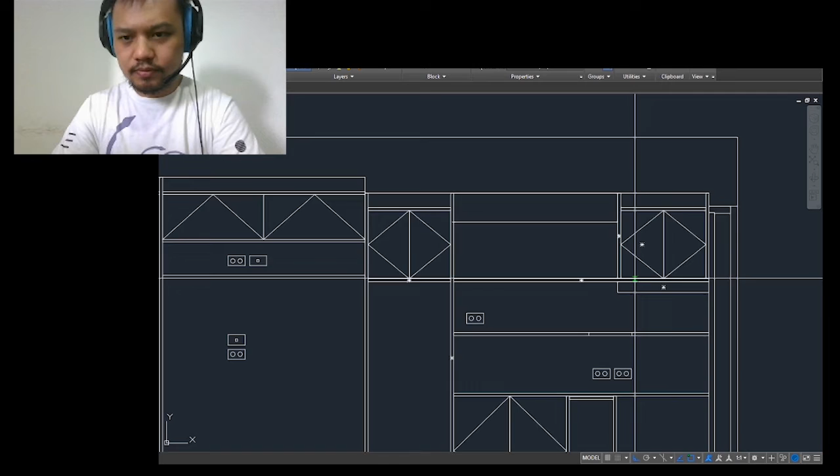Perfect, perfect, perfect. Delete that, delete this. And once again, we're going to leave that alone for now. And then here we also have the same situation going on, which I forgot about. So, okay. Offset 50, good. Then PL. Okay, move 25. Mirror that. There we go. Trim those. All right, join, join, join.

Next thing we're going to do here is offset 25. Do the same on the other side. 25. Good. How high is this supposed to be again? I don't have an indication of how high it is. It's 455, guys.

So let's just take one of these. Move 455. Perfect. Then take this, place them on the center here. Good. Take those, move them to the top as so. Indicate the opening. Nice. Get that, get this, delete, perfect. Save, save, save, save, save.

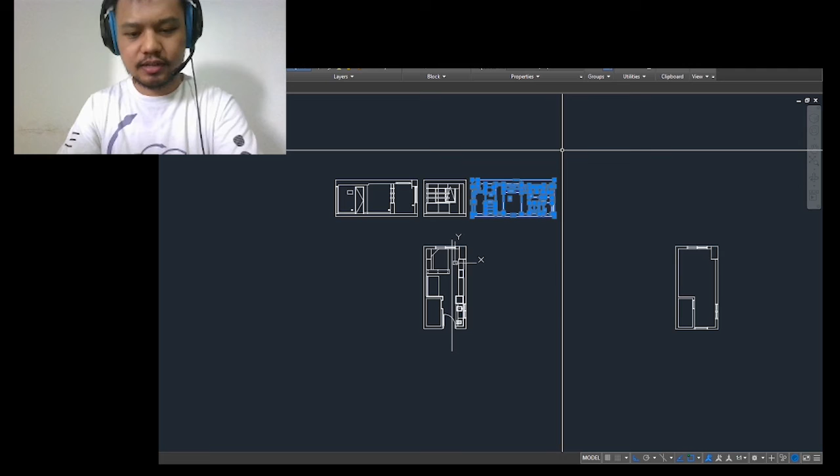So this part is lower, of course. So let's go ahead and copy this first. Oh my gosh, circle again. Copy. There. And let's start with, oh no, bring the kitchen closer here. Yeah. So what are we going to see here?

We're still going to see this. Going to see this. We're going to see the door. And let's say we're going to see, what else are we going to see? Because from this end, we can still see this cabinet.

I suppose we're going to see this here. We're going to see this definitely. And we're going to see this. Bam, okay, those are the things that we're going to see. Once again, here. Oh, we're going to see the door. Where's the door? Gonna go into my Arnold Schwarzenegger, I don't know.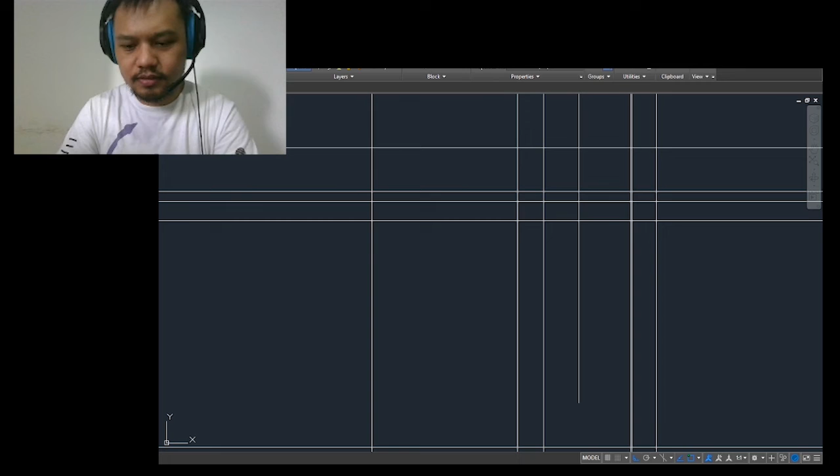So we don't really see the whole door, but we do see the door. Bam. Whoop, whoop, all right, next. Offset that, 50. Bam, all right. Whoa, that one. And that one, okay, get these. This one. And that one, join, okay.

So we're not actually going to see the whole door because of this one right here, right? No, not that one. Because of, where is it? This one, this one right here. Right.

So let's go ahead and cut that. Trim it here, cut it there. Bam. And here. And here we have a baseboard I forgot about. Oh, I'm already losing my mind from all this work.

How long is this video gonna be?

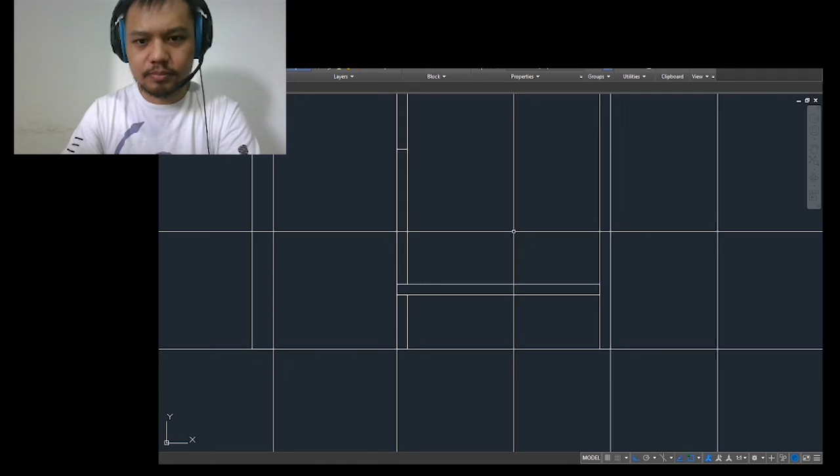Close, okay, move this up by 20. Okay. Bam, bam, bam, bam, okay. Then we have another 20 up here, or down here, sorry. All right, how high is this? Should be 100. 100 on the dot, perfect. Next.

Got this going on, 350. 200. 20, 330, oh fudge, 230. Oh my gosh, how high is this? I forgot already, how could I forget? I just typed it in too. This is what I don't like about CAD, man, it doesn't show. The hell. Uh-huh, 180.

Join that, move that up by, I don't know, let's say 15, I guess. That's fine. Bam. Copy that. 1, okay, and copy that one more time. This one, move it up by 10. 10. Save again, okay.

So this, what is this? Oh, it's the shelf, damn it. Okay, this is kind of an easy one though, we can just grab this. Okay, grab those, grab these, grab these. Yeah, make my life easier.

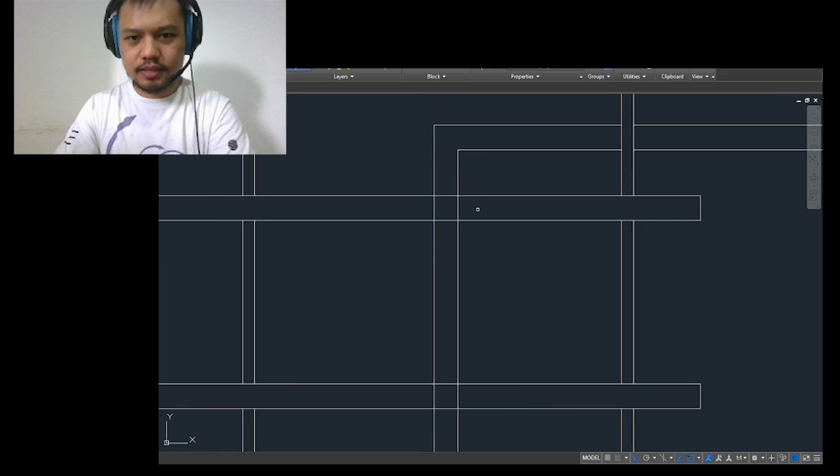Okay, and then we're gonna trim these. Bam, bam, bam, bam, and bam. Get rid of this. Oh no, I forgot again. The opening, how does this door open?

So we're actually on the wrong side. It opens towards the ref, doesn't it? I believe it does. This is the refrigerator on this side. Yeah, so it's something like this. Where is it? There it is. Okay.

All right, now we gotta get rid of that. And these, we can trim those. All right, all right, all right. Okay, get rid of that, get rid of these, get rid of that, get rid of that. Get rid of this, all right, delete. This one. Let's go ahead and put it all the way over here. Yeah, all right. Yeah.

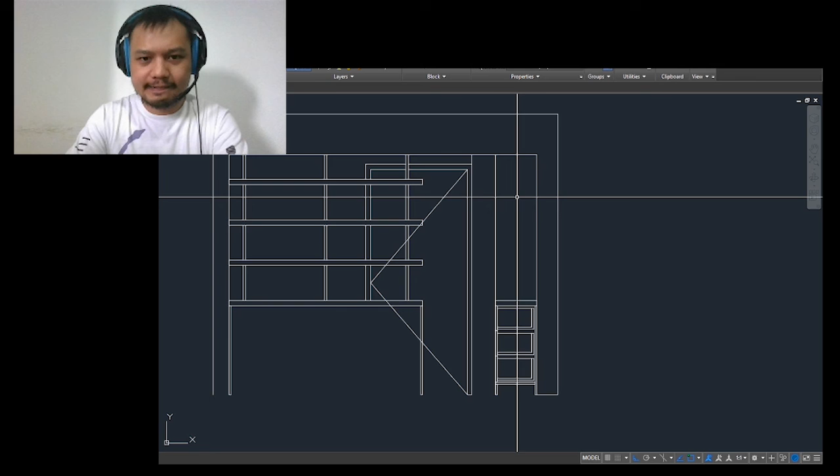Okay, there we go, all right, we're almost there guys. Not really, but we're just gonna say it. Here. Freaking circle, man. 150. And all the way here. All the way here, trim that. And this one.

Let's go ahead and copy this instead. Put it here, stretch all the way down to here. Then we're going to mirror it. Why? Because that's the proper way. There it is. Oh, we finally did it, guys.

Now, on this side is where we have most of the light switches, which is why I had to put so much effort on this side. Anyway, the light switches, I've actually put one on the cabinet here.

So I'm going to go ahead and copy one of these again. Copy, right there. And we're going to distinguish this by removing these and replacing them. You know what, let's keep them for a moment.

25, 15, 25. Close, okay. Mirror. Yeah, and that is how we distinguish the outlet from the switch. Okay, make that into a group.

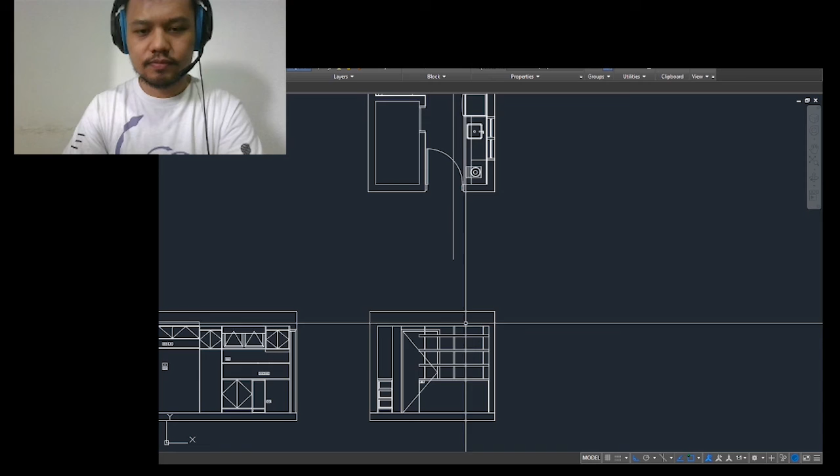Then we also have another switch on the other side of the wall, which is at 1335 from the floor and 95 from the wall. 1335, 95. Oh, this one is just flush to the door as well, so fudge it.

Why doesn't it work for me? Trim, trim, trim. I already forgot the dimensions, damn it. Rotate, bam. How far is it from the floor? It is 1355. Okay, move 1355. Bam, okay.

And let's go ahead and get it here. The door, how far is it from the door? Or the wall, sorry, 95. So we're going to take that. 95, bam, perfect. And we have one more light switch actually.

Way over here on this side of the wall, which is kind of low for a light switch, 1005. Oh, but this light switch we can't see. Damn. Well, we're just gonna have to make it invisible then. Let's see how far it is.

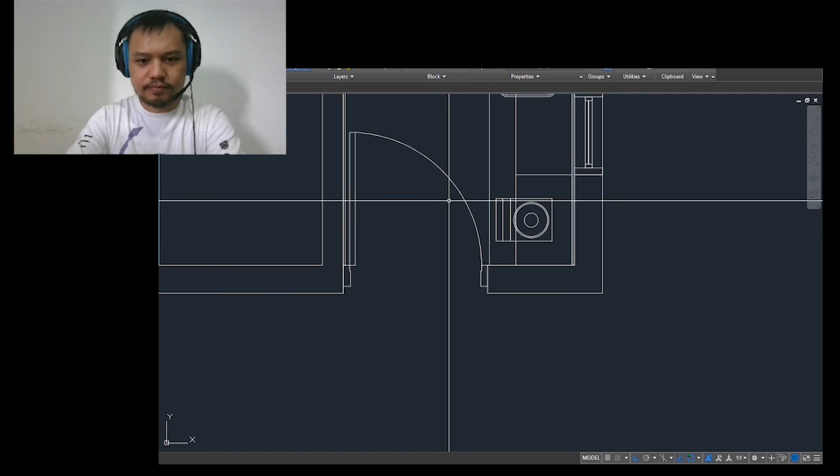Let's see here. How far is this from here? 95, okay, that's good, that's good. And then here, let's go ahead and have it at, we're in the middle of the drawer, so somewhere around here, 1200, yeah good.

Oh sorry, we want it further actually, somewhere here. Yeah, and then we're gonna have the last one. Excuse me, excuse me, excuse me. We forgot about the shelves. All right, let's add that, shall we?

Okay, delete that, copy this. Okay, very good, very good. Then we have one more here on the top. Move that 100, and we have the fascia on top of that. Nice job, nice job. Move this here. All right.

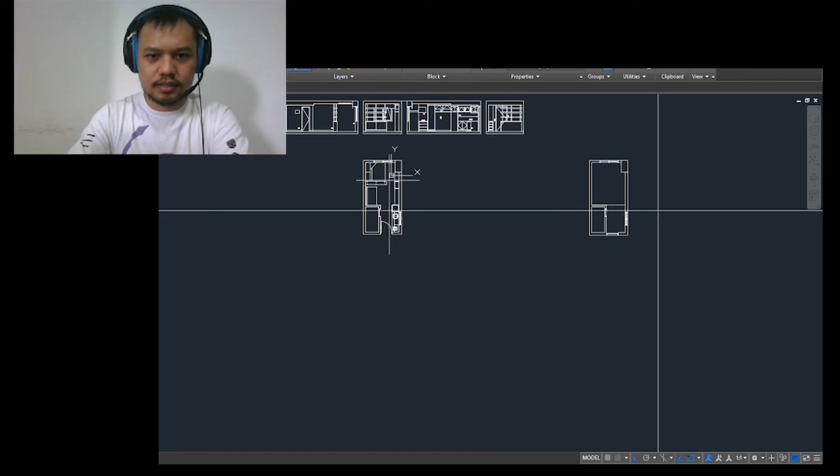This is the RCP, reflected ceiling plan. So we got this here. Move 70, bam. And then we got this here, 400. Okay, let me see, that goes all the way up to here. Right?

Oh wait, I forgot, we made some proper adjustments. So that means I'm going to have to take these wall thingies. Okay, and copy that. Right there. Which reminds me. Okay, there we go.

And let's see, let's go ahead and take these as well. These don't change. Ah frick, circle again. Copy. Darn it. How did that happen?

Is that right? To the end. 2,410. 2,450. How did that happen? How did that happen? Oh that's right, I forgot. I'm an idiot.

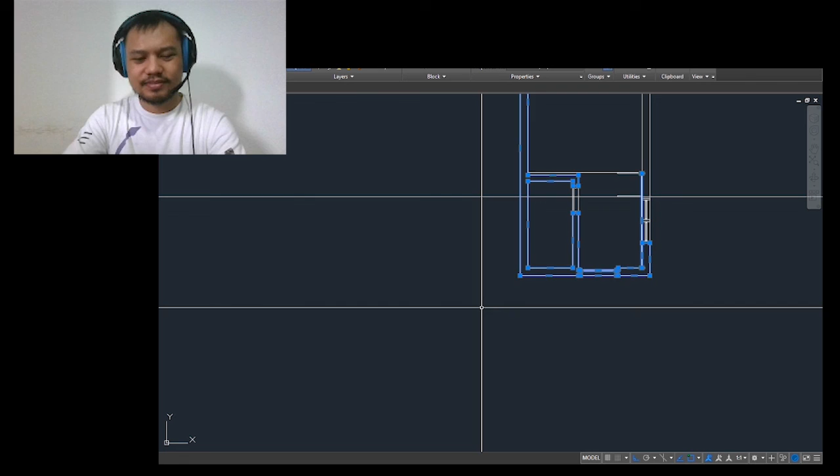40. This right here also should be 40. Stretch 40, bam. Sometimes I just forget things, I'm sorry. And then, 400, bam.

Okay, let's make this one. Okay. And what else here? This one goes all the way up to here, so we don't really have to do that, let's just take these. Oh my gosh, copy. Why? Okay, and then this one here. And finally, that one is left alone. That's fine, that's fine.

This one has the beam, which is 100, 235, okay. 235, okay, trim that. Nice. And then we have this one, 20. Okay good, and what's next?

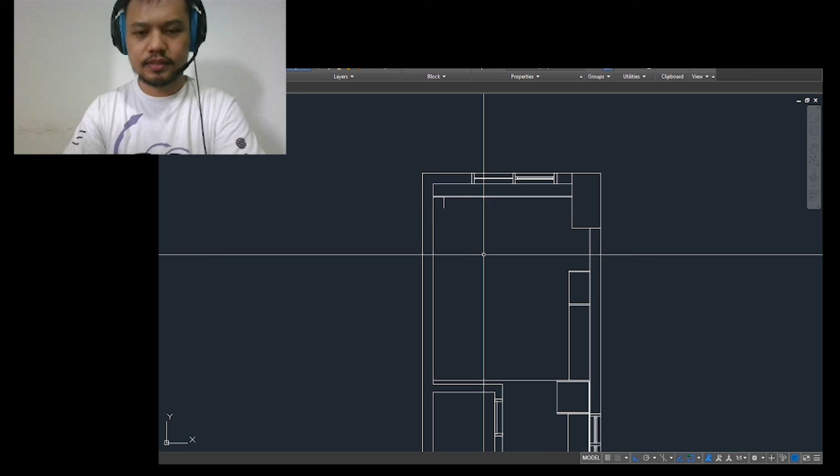Let's go ahead and just close this off. And 200 and 200, right? Right. What is the depth of these things? 980 and 1465. 980, 1465, 980. Close, okay, delete that. Good.

Then we also have the lights, the freaking lights, man. Move that 1000, or 10,000 sorry. So we're almost done guys, I think I'm just gonna do the render next time.

Okay. Come on, come on, grab it for me, damn it. I'm so freaking hungry right now, and this thing is not working with me. 145? Why don't you just grab on? Do you not have a center? What the hell?

I guess it doesn't have a center. Oh, there it is. Freaking... No, give me the center. Oh my gosh, you don't see what I'm wrestling with here.

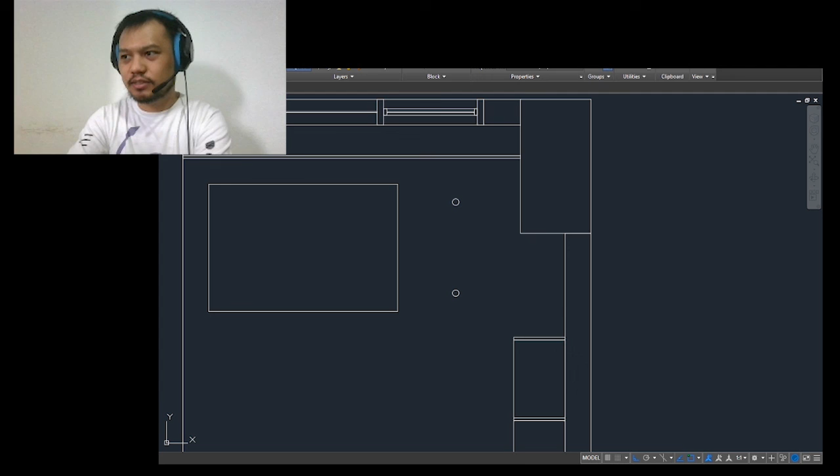This one should be a mirror, exact mirror of that, which is, freaking hell. Oh my god, I hate it. Please, just stay. How long is this? Oh man, it's 700. Why did it become 700? That's the question, that's why. Because I didn't follow the rules. There we go.

Okay, copy again, copy, not circle. 680, okay, perfect, not so perfect, I don't know. Let's go here. Come on, just freaking, would you just... 200. 200, and how far is it from you? And it still doesn't want to, freaking hate these things.

You know what I'm trying to get, you know I'm trying to get the center of you. I don't know why you're being so difficult. 660? I guess it's 660. Let's figure it out. All right, I swear. And then if I go back in this thing, hmm, 655. Fine, let's just move it by 5. 5, okay, next.

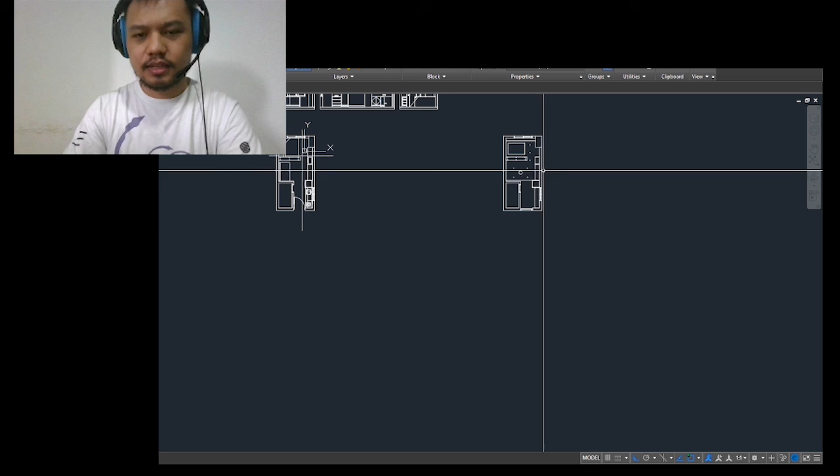And then we have more lights here. Ugh, shucks. That makes me remember something, there's a water sprinkler here. Where is it exactly? It's right here. No, sorry, it's right here. No, no, no, no, no, no. We'd see it here though.

Would we? No, we'd see it here. Where did I cut this from? Oh, it's because I'm coming from the kitchen, idiot. Sorry, sorry, sorry. Should be up to here. Right. Right? Am I right? I'm losing my mind, guys, give me a moment. But that's the right height.

Where is this scene from? 900, and this is 385. Where's my shelf? Damn it. I think I've screwed myself.

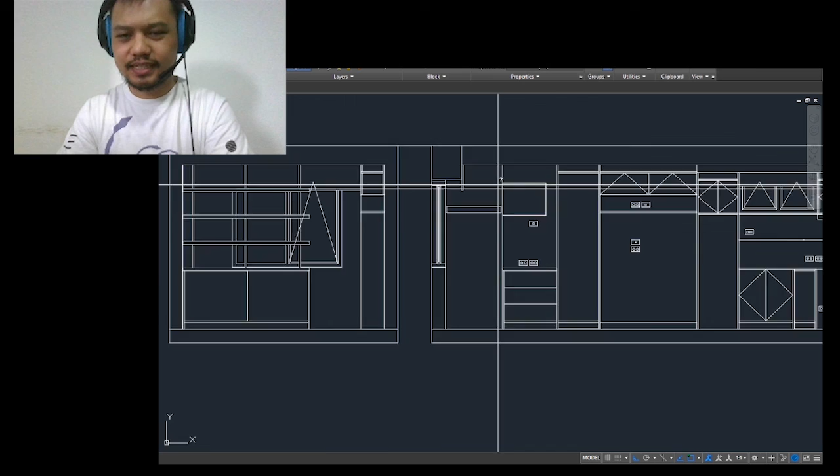Oh, it is a bit lower. No, it's a bit higher. Oh my goodness. How high is this then? 380. 387, 385, so I lowered it by 7, so then all of them would be lower on this end. Yeah, I made a mistake. Okay, guys.

This is taking forever, so I'm actually going to cut it here. I was really hoping to finish everything today, but I'm way too meticulous for this, and I knew within myself that I wouldn't have been able to anyway. I need at least another day to do this, but we're gonna end it here, guys.

I hope you guys enjoyed watching me have a mental breakdown while I did this.

But anyways, yeah, this isn't even done yet. I still have to label the wall finishes, label what kind of outlets they are, label the materials, do the callouts, do all the dimensions. There are a lot of things to do as an architect.

But it's another thing also that you have to be very meticulous in the way you make details. Like here at the end, I figured out that I may have made a mistake with the ceiling height, but that's just how it is. The only thing I can do is really just correct it. Unfortunately, it's not really a big mistake, but nonetheless, it's still stressful.